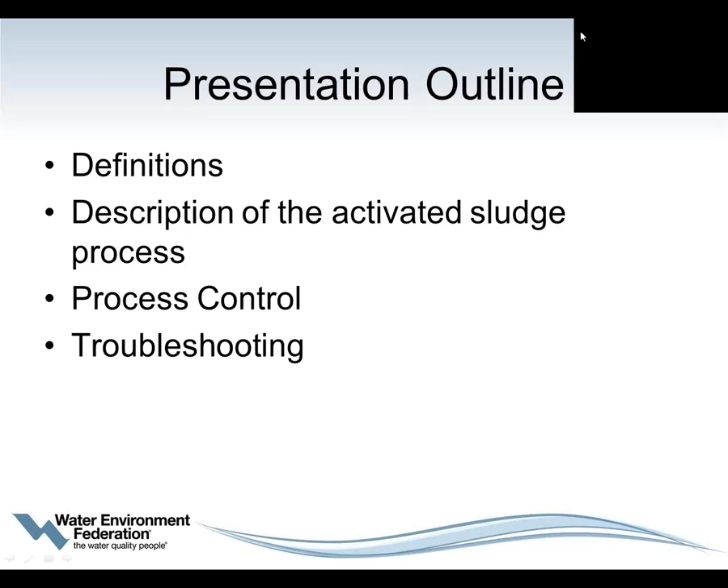First, some definitions that we're going to use throughout this webcast. The first is heterotrophic. Heterotrophic organisms are organisms that derive carbon for cell growth and energy from organic compounds. I like to describe heterotrophic organisms as us, and you'll see that explanation, why it holds, in just a little while. But briefly, we use carbon for cell growth, and we get our energy from organic compounds.

And we'll go into that a little bit more later. Autotrophic organisms derive cell growth from carbon dioxide, so they use inorganic forms of carbon. They're a little bit different in their behavior. Those organisms exist in the bioreactors along with the heterotrophic organisms, and they're responsible for nitrification, which occurs in most activated sludge wastewater treatment plants.

Aerobic, as all of you know, means that we have oxygen, dissolved oxygen, in the water. And we're going to say that an aerobic tank really has about 2 milligrams per liter of dissolved oxygen. And that can vary from one plant to the next.

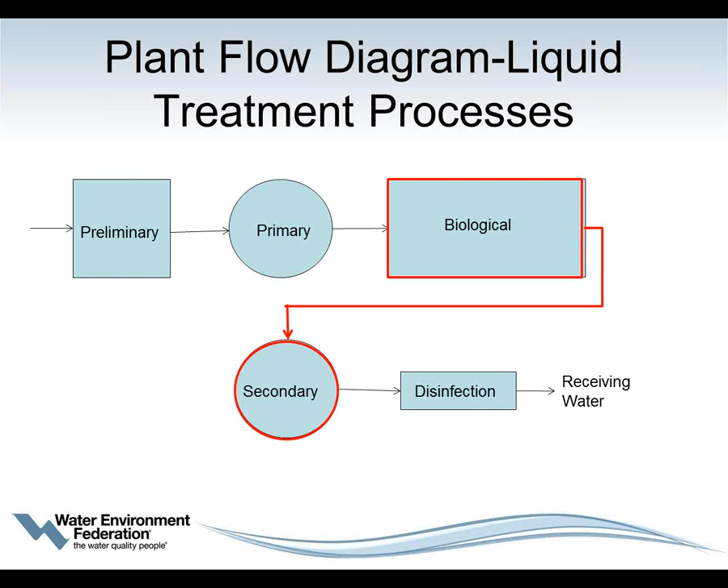As you can see from this diagram, if you have primary clarifiers, the primary effluent is what enters the biological system. So when making calculations around the activated sludge process, if you have primary clarifiers, you always use the parameters associated with the primary effluent. If you don't have primary clarifiers, then you would use influent characteristics.

So secondary treatment is biological wastewater treatment, and it removes at least 85% of BOD and suspended solids. If you think about a typical NPDES permit, which was mandated under the Clean Water Act of 1972, it mandated secondary treatment, which said 85% removal of BOD and suspended solids, and biological treatment meets that. It also stated less than or equal to 30 milligrams per liter of BOD and suspended solids.

There are two types of secondary treatment. Biofilms, also called attached growth or fixed film, typically trickling filters and rotating biological contactors, and then suspended growth, which is the activated sludge process, which is what we're going to be concentrating on in this webcast.

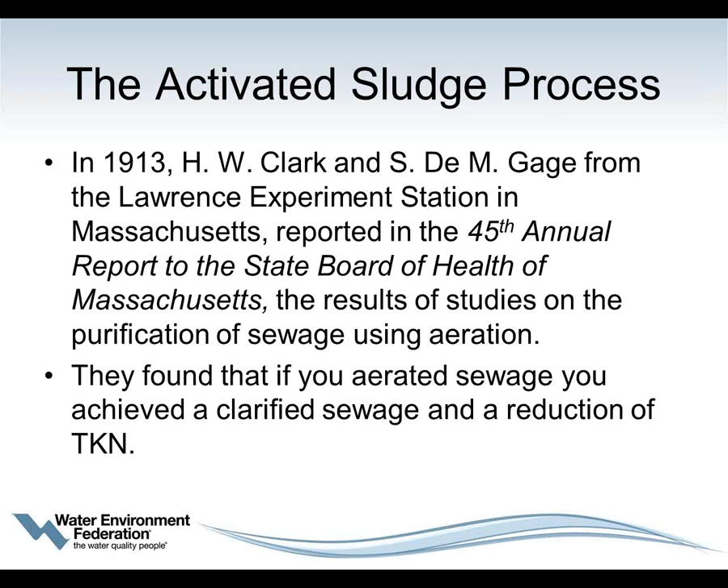So this year is a very important year for the activated sludge process because it's 100 years old. In 1913, two researchers, Clark and Gage, at the Lawrence Experiment Station in Massachusetts, found that if you aerated sewage, you achieved a clarified sewage and a reduction of nitrogen. Very interesting results. They published those results in a report to the Massachusetts State Board of Health, and that was in 1913, 100 years ago.

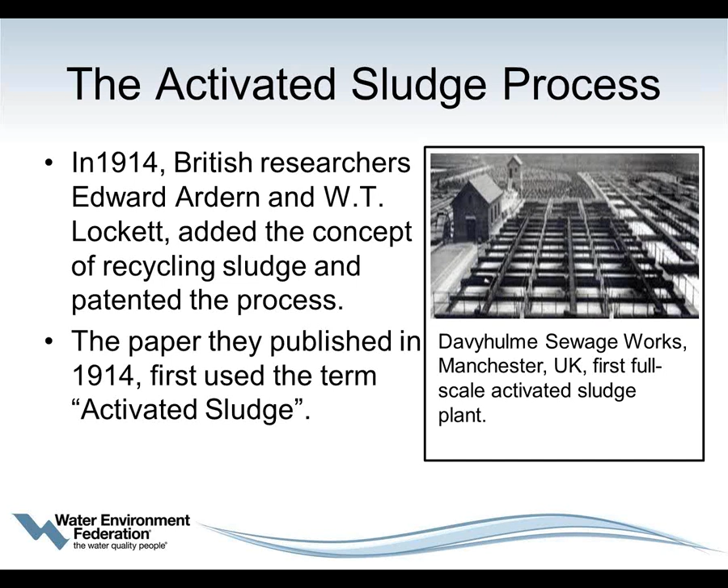In 1914, two British researchers, Ardern and Lockett, took the concepts from Clark and Gage, and what they added was a recycled stream, and they patented this process. In a publication in 1914, they first used the term activated sludge. The photograph you see is the original first full-scale activated sludge plant, at Davyhulme Sewage Works in Manchester, England, and it is still a functioning wastewater treatment plant.

When we look at the activated sludge process, you can classify it according to the loading rate, expressed as volumetric loading, or by SRT, either a very short or a very long one, or food to microorganism ratio, a very low one or a very high one. They're classified as high rate, conventional, or low rate, depending on these things such as SRT, food to microorganism ratio, and volumetric loading. We're going to be concentrating on a conventional activated sludge process.

Typically, a conventional system will remove BOD between 85 and 95%, and you can even see it higher, close to 99% BOD removal in a well-designed and well-functioning conventional activated sludge process. For most of them, the mixed liquor suspended solids concentration is between 1,000 and 3,000 milligrams per liter, but I've seen plants operating up to as high as 5,000 milligrams per liter.

Typically, they'll have an SRT between 3 and 15 days, although normally for BOD removal you see it at the lower end, 3, 4, 5, 6 days, and F to M ratios between 0.2 and 0.4 pounds per pound or kilograms per kilogram.

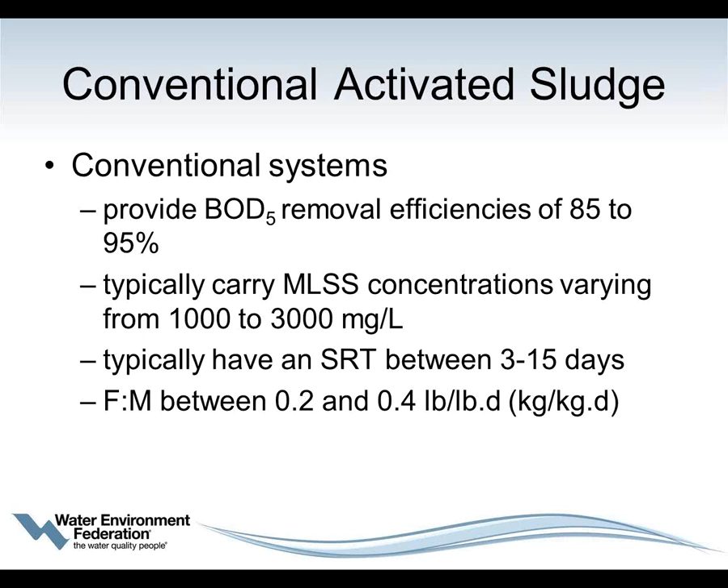So for an activated sludge plant, we're going to need a biological reactor, aeration tank, which could be a single unit or multiple units. We need a source of aeration because we need oxygen and mixing. We need a way of separating out solids, so we have clarifiers, secondary settling tanks. We need a collection and delivery mechanism for the return activated sludge, and we need a means of removing excess solids from the system.

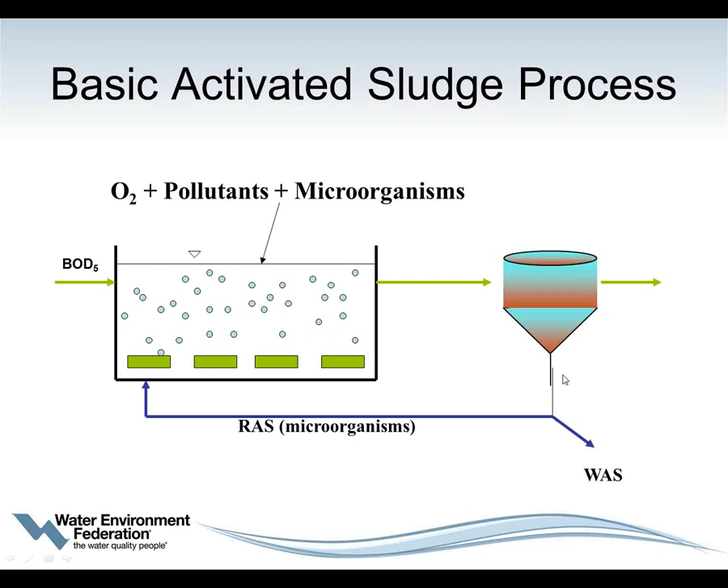So here's a basic activated sludge process. We have our BOD5 coming in with either our effluent, our influent, or our primary effluent. We have our biological reactor, which is aerated, so we have oxygen. We have our return activated sludge, providing our microorganisms, and then we have a waste stream so that we can control the amount of microorganisms within the process.

Just a reminder on biochemical oxygen demand. Biochemical oxygen demand is made up of two different aspects: one is the oxygen demand by the carbonaceous compounds, the organic compounds, and the other is the nitrogenous oxygen demand, made up of nitrogenous compounds. The two of them together form total BOD.

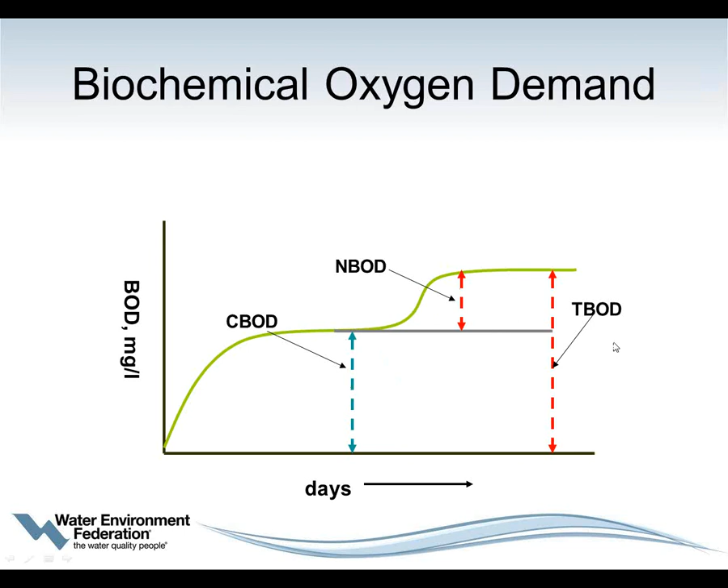Some states write their permits with total BOD. Some states write their permits with CBOD, just the carbonaceous portion. In order to get CBOD, you add an inhibitory chemical into the bottles. It inhibits nitrification, so you just get your CBOD. So just recall now that total BOD is made up of these two factors.

The activated sludge process removes carbonaceous BOD and also nitrogenous BOD. Most activated sludge treatment plants do those processes simultaneously. The carbonaceous BOD utilizes heterotrophic organisms, while nitrification, the nitrogenous BOD, uses autotrophic organisms, and it happens simultaneously. Some treatment plants don't want to nitrify, so they can operate their plant so it doesn't. But for the most part, a typical activated sludge plant will nitrify, satisfying that nitrogenous oxygen demand.

The design of an activated sludge plant is based on the length of time the solids are kept within the process, the SRT; the amount of food provided to the bacteria, the F to M ratio; and the hydraulic retention time. The hydraulic retention time is analogous to the detention time you'd calculate in a clarifier or settling tank, so that differs from the SRT. The hydraulic retention time is really how long a droplet of water remains in the system. With the solids retention time, it's a bit more complex.

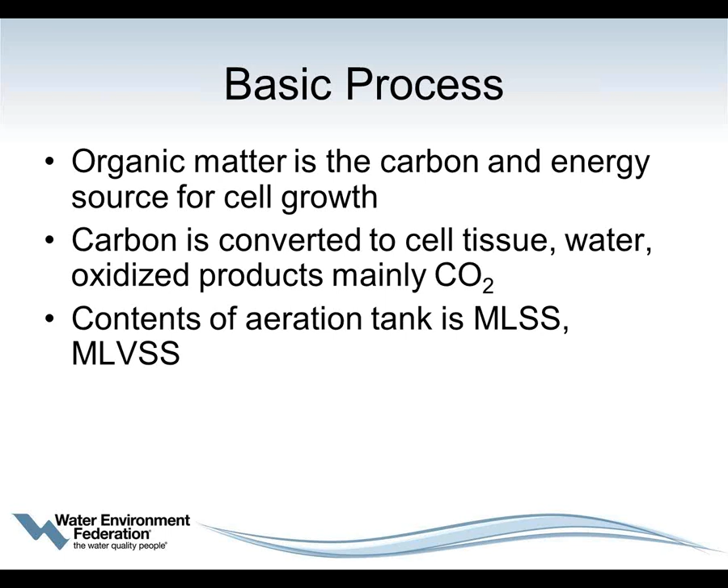As I mentioned earlier, heterotrophic organisms are very much like us, and it's a good way to remember what they do. We eat organic matter, which contains carbon - that's our energy source and allows us to grow cells. And when we respire, carbon dioxide and water vapor result. Very similar to our metabolism are the heterotrophic organisms.

The activated sludge process is really a big biochemical factory. It's amazing when you think of everything going on within that biological reactor and the various populations of organisms we have within that system. We have bacteria, fungi, protozoa, rotifers, nematodes. Bacteria are really the significant organisms for consuming the organic matter, so those are the ones really doing the work within these biological systems.

The predominant species of microorganisms depend on a lot of things: what are the characteristics of the influent wastewater, what are the environmental conditions? By environmental conditions I mean pH of the water, temperature, and dissolved oxygen - that's the environment in which these organisms are living. How our process is designed impacts our microorganisms, and how we operate our treatment plant.

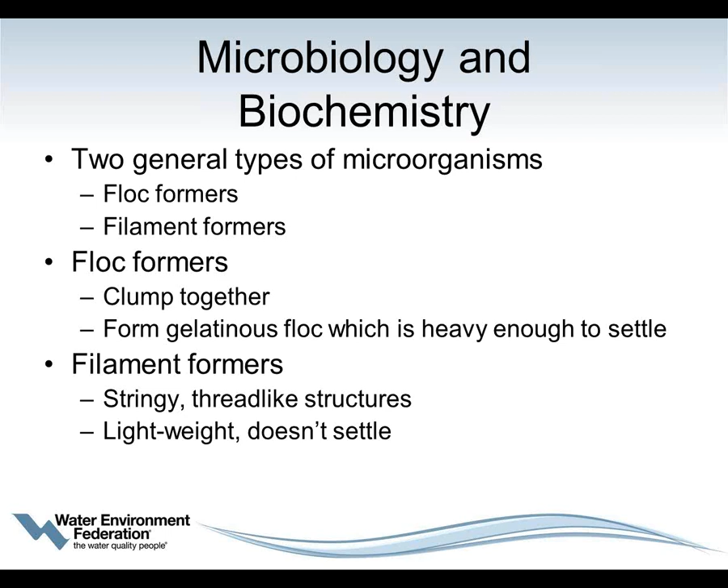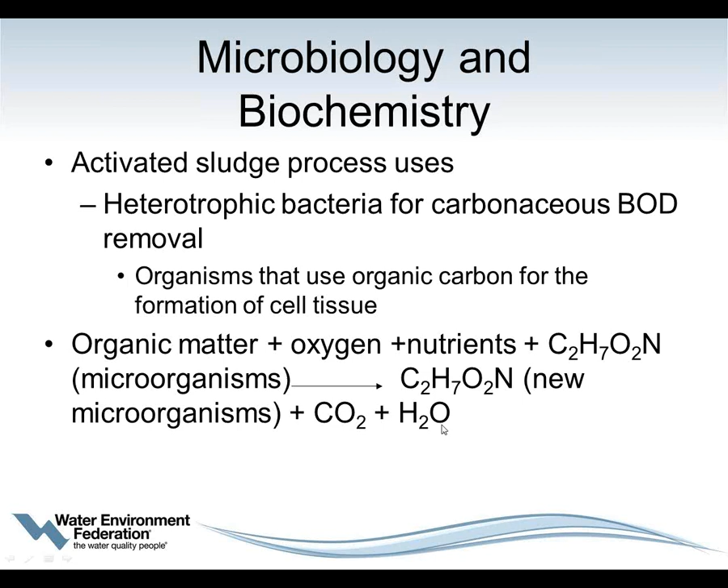So what happens is we produce new cells because we've gained energy from the organic matter, and the organisms respire, breathing out carbon dioxide and water.

As I mentioned earlier, in most activated sludge plants you'll also get nitrification, which is the conversion of ammonia to nitrite and nitrate. Many of you will have ammonia limits in your permit, often not greater than 2 milligrams per liter, because ammonia is toxic to many aquatic organisms. Nitrification is good because we get rid of toxic ammonia and form non-toxic nitrite and nitrate. This should not be confused with nitrogen removal, because we still have nitrogen being discharged to aquatic environments, but it does remove the toxicity of ammonia.

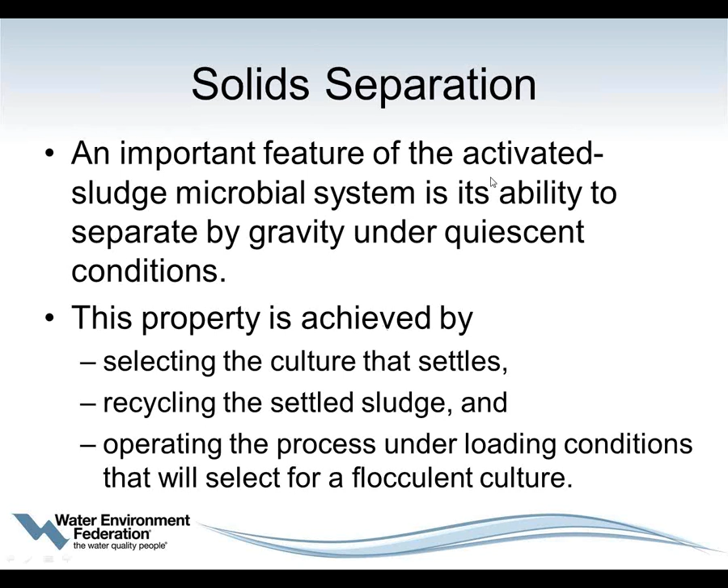So now let's look at process control.

With process control, it is our responsibility to ensure there's sufficient nutrients and food. We need to keep a balanced population of bacteria and protozoa, provide sufficient oxygen for these organisms, and provide mixing.

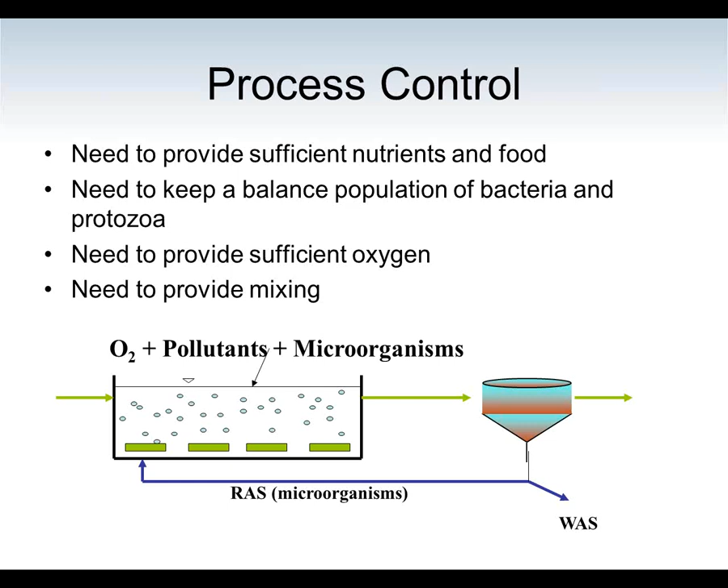So where do the food and nutrients come from? They come from the incoming wastewater. The food is in the form of BOD, and the nutrients are the nitrogen, phosphorus, and trace minerals that are part of the wastewater stream.

There are actually treatment plants with influent wastewaters deficient in nitrogen and phosphorus, so to make the process work they have to add nitrogen and or phosphorus so microorganisms can reproduce and grow. As a general rule, for every 100 parts of BOD you need 5 parts of nitrogen and 1 part of phosphorus. Recall, cells are made of carbon, hydrogen, oxygen, nitrogen, and as I mentioned, some phosphorus.

We keep our balanced population through the return activated sludge, the RAS. That's the source of microorganisms to the aeration tanks, and typically we return 30 to 50% of influent Q. We usually have pumps that allow us to return a lot more, because designers provide typically 100% recycle rates, but we normally operate in the 30 to 50% range at most treatment plants.

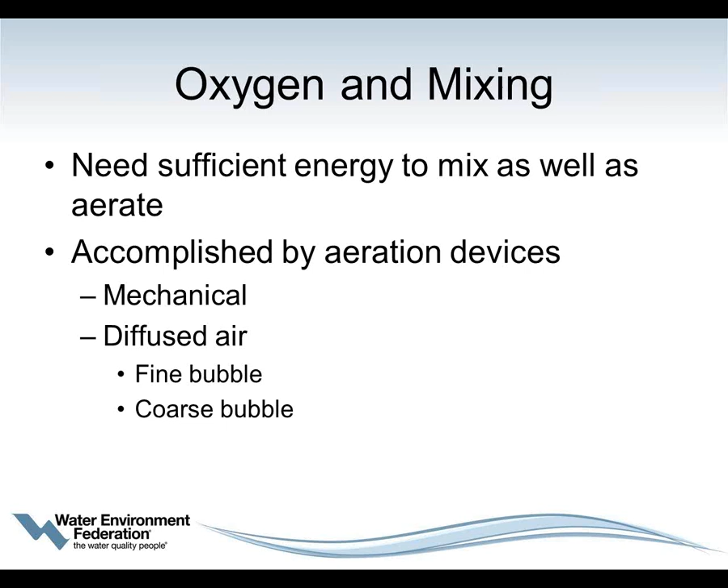Just as an aside, because so many of us are concerned about the high energy costs associated with operating our wastewater treatment plants, aeration is the biggest consumer of power in the wastewater treatment plant and represents at least 50% of the total power demand for treatment. So as you look to new aeration equipment, it's really important to look at designs that meet the mixing requirement and the oxygen requirement, but at the lowest possible cost. There's now a lot of new technologies on the market that really allow us to optimize for the most efficient energy costs.

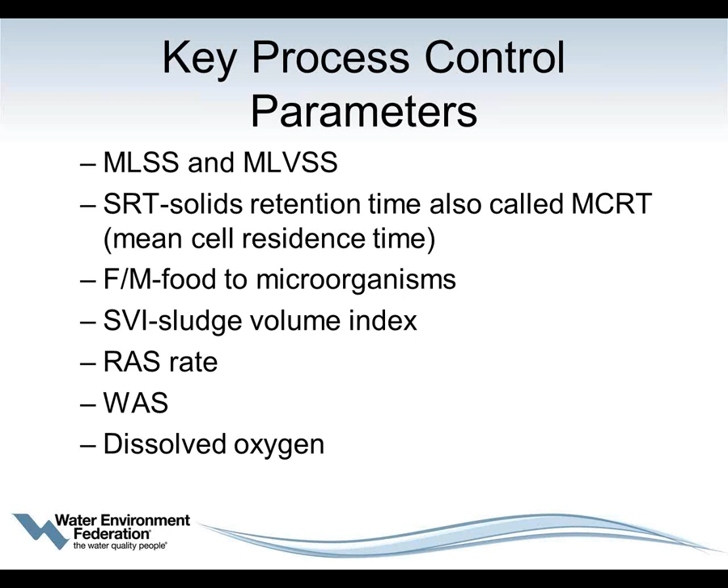So as we look at process control, what are the key parameters that we have to look at? Well, mixed liquor suspended solids and mixed liquor volatile suspended solids. Our solids retention time, which is also called MCRT, mean cell residence time—I use SRT. Food to microorganism ratio, F to M. Sludge volume index, SVI. Our return activated sludge rate, and our waste activated sludge rate, and dissolved oxygen.

So what is mixed liquor suspended solids? It's the concentration of suspended solids that's in the activated sludge mixed liquor. We measure that—most treatment plants measure it on a daily basis because it's important in all of our process control calculations, and it really gives us an idea if we're in a stable operation. We express the results in milligrams per liter. What you do is you filter a sample, you dry these solids, and it's a combination of weighing them and re-weighing them. Typically 1,500 to 3,500, 1,000 on the low end.

On the high end, perhaps as high as 5,000 milligrams per liter. But it's very plant specific. What might be good for you might not be good for someone else. So you might run at 1,200 milligrams per liter, and your friend who runs another treatment plant might be operating at 4,000 milligrams per liter.

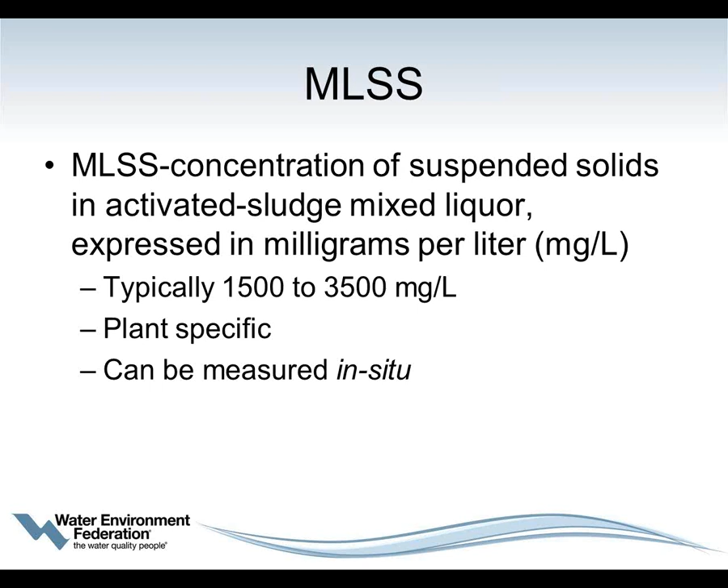Mixed liquor volatile suspended solids is the fraction of the suspended solids in activated sludge mixed liquor. It can be driven off by combustion at 550 degrees Celsius—you normally do it in a muffle furnace. So it's really all of the volatile aspects of the mixed liquor. We use it to indicate the concentration of microorganisms available for biological oxidation, so it becomes an indicator to us of how many microorganisms we have within the system. It's not an exact measurement because in this test we're measuring any volatile material, so dead cells that are no longer working our process will also show up as mixed liquor volatile suspended solids. But it's a good and close approximation and gives us the information that we need to manage and control our treatment plants.

Solids retention time is the same thing as mean cell residence time, is the same thing as sludge age—these terms we can use interchangeably, depending on what your favorite term is. Mine happens to be SRT, so I always use SRT. But they all describe how long solids remain within your system. And remember, the system is not only the biological reactor, but also the clarifier—we have to think of those two tanks as the same unit process.

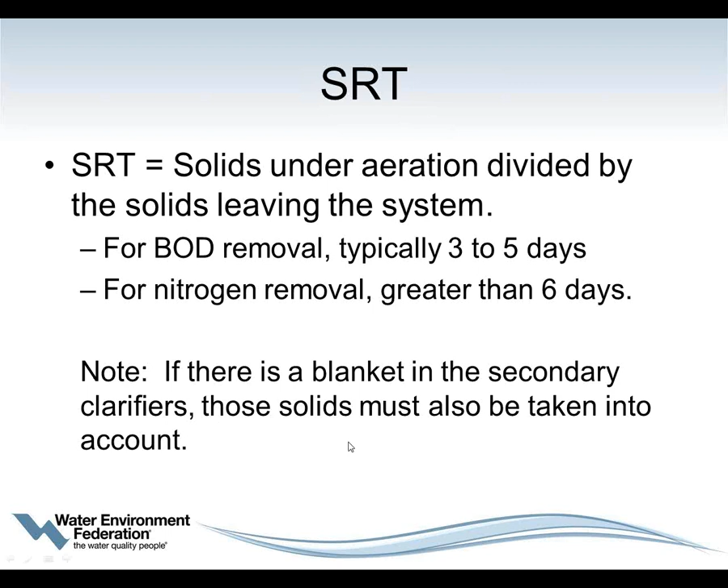So first, we'll look at this with US units. Our solids under aeration are calculated by the volume of the aeration tank in million gallons, times our conversion factor, which is 8.34 pounds per million gallons per milligram per liter, times our mixed liquor suspended solids in milligrams per liter.

And our solids leaving the system is our waste flow in million gallons per day times our conversion factor of 8.34 pounds per million gallons per milligram per liter times the concentration of our waste activated sludge in milligrams per liter. So that's the mass of waste activated sludge that's leaving the system.

And now we're going to add to that the mass of solids that are going out with our effluent. So that's our plant flow in million gallons per day times our conversion factor of 8.34 times our effluent suspended solids concentration. So if we put them together, it's solids under aeration, which is this first calculation, divided by solids leaving the system, which is this portion of the calculation.

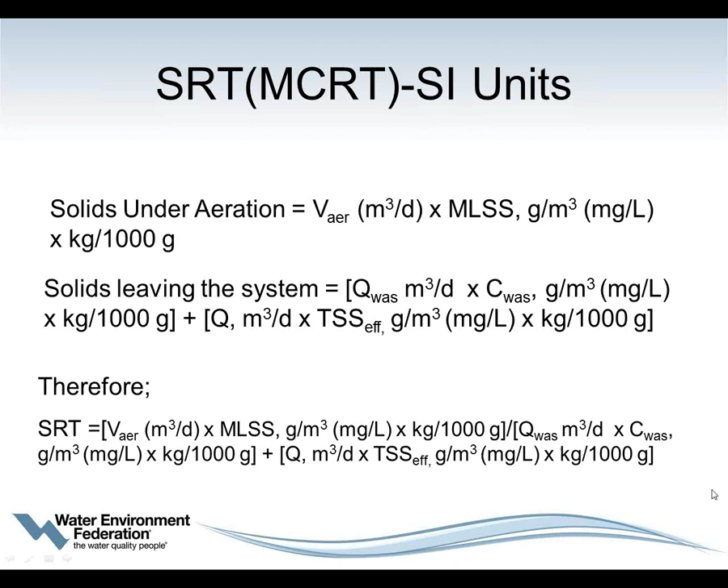So let's work through an example. If we have a treatment plant that has an aerator volume of 1.4 million gallons, that's equivalent to 5,300 cubic meters. Our plant flow is 3.1 million gallons per day, which is 11,735 cubic meters per day. Our mixed liquor concentration is 2,650.

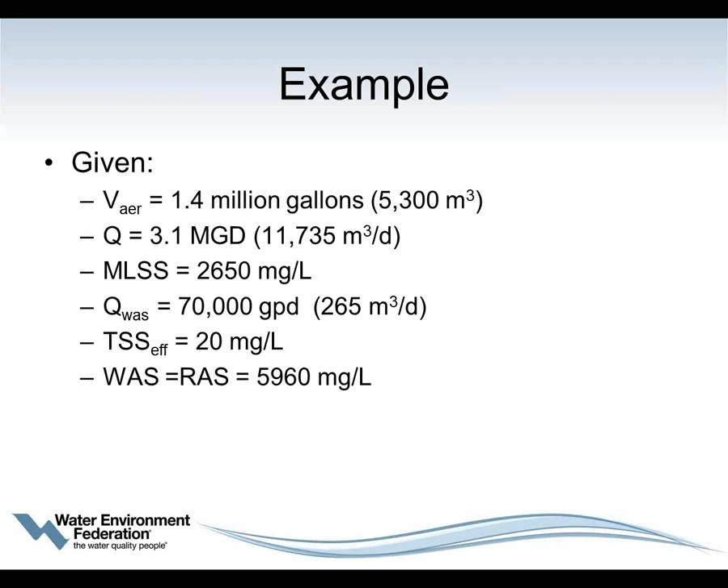Our waste flow is 70,000 gallons per day, which is equal to 265 cubic meters per day. Our effluent suspended solids is 20 milligrams per liter, and our waste activated sludge concentration is equal to our RAS concentration at 5,960 milligrams per liter. Most treatment plants waste from the RAS lines, so the concentrations are going to be similar. Some plants waste mixed liquor, and in that case you would use the mixed liquor suspended solids concentration.

So here's a worked example using those numbers. We have our 1.4 million gallons times 8.34 times 2,650. The million gallons cancels out, the milligrams per liter cancel out, and we're left with pounds. So the number of pounds under aeration,

30,941 pounds. The solids leaving the system, we said 70,000 gallons, but we want that in million gallons, which is 0.07 million gallons, times 8.34 times 5,960, plus our plant flow at 3.1 million gallons times 8.34 times 20 milligrams per liter, which is 3,997 pounds per day. So it's solids under aeration divided by solids leaving the process, so we have an SRT of 7.7 days.

If we look at that same calculation using SI units, we have a volume of 5,300 cubic meters times our concentration of 2,650 grams per cubic meter. We divide that by 1,000 and we get 14,045 kilograms. Cubic meters cancel out, grams cancel out, and we're left with kilograms.

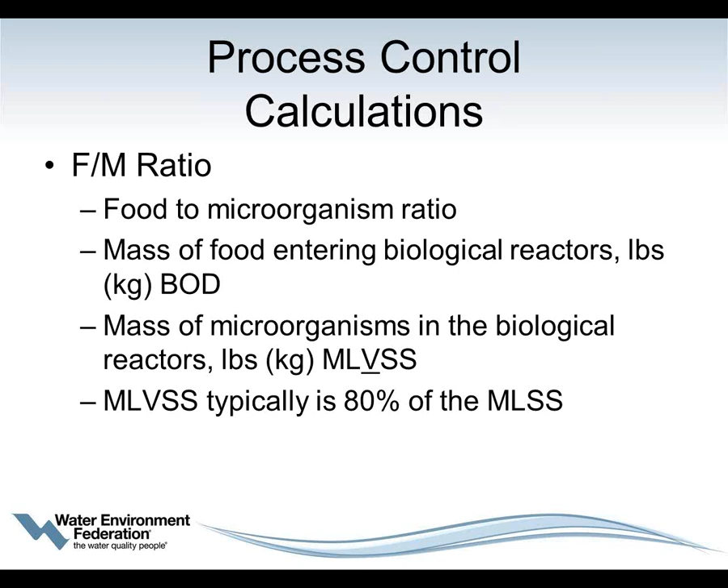And this time, we're looking at the mixed liquor volatile suspended solids. So in the SRT, we used mixed liquor suspended solids. In the F on M ratio, we're going to just be looking at the volatile portion of that, which is typically about 80% of the mixed liquor suspended solids.

So here's our calculation in US units. Our food is our plant flow in million gallons a day times our conversion factor, 8.34, times our BOD in milligrams per liter. And our microorganisms are our volume of our bioreactor in million gallons times 8.34 times mixed liquor volatile suspended solids. We divide the food by the microorganisms.

And here's a worked example. We're using a mixed liquor suspended solids of 3,000 milligrams per liter, 82% volatile in this example. We have our influent flow of 16.5 million gallons a day. The volume of our bioreactor is 7.5 million gallons. Our primary effluent BOD is 135 milligrams per liter.

So in calculating our food to microorganism ratio, it's our plant flow, 16.5 times 8.34 times 135 milligrams per liter, divided by 7.5 times 8.34 times 3,000, which is our mixed liquor suspended solids. But remember, we want volatile suspended solids, so we have to multiply that by 0.82, 82%. If you look at this, we can cross out these, this cancels this, so you don't even have to multiply by 8.34 in either the top or the bottom. And we get an F on M ratio of about 0.12.

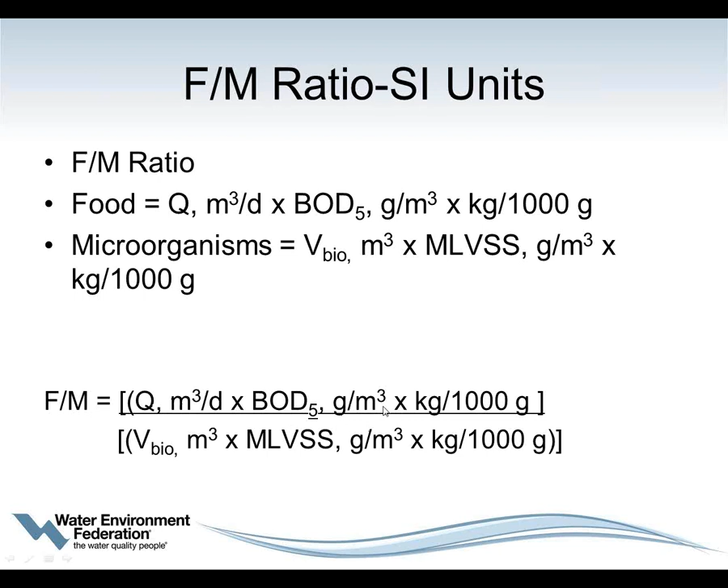In SI units, it's basically the same calculation, except now the flow is in cubic meters per day. The concentration is in grams per cubic meter, and again, our conversion to kilograms. So we still have our 3,000. We've converted now our plant flow, which we've converted to the metric system, which is 62,460 cubic meters per day, times our concentration of primary effluent BOD, which is 135 grams per cubic meter, converting to kilograms.

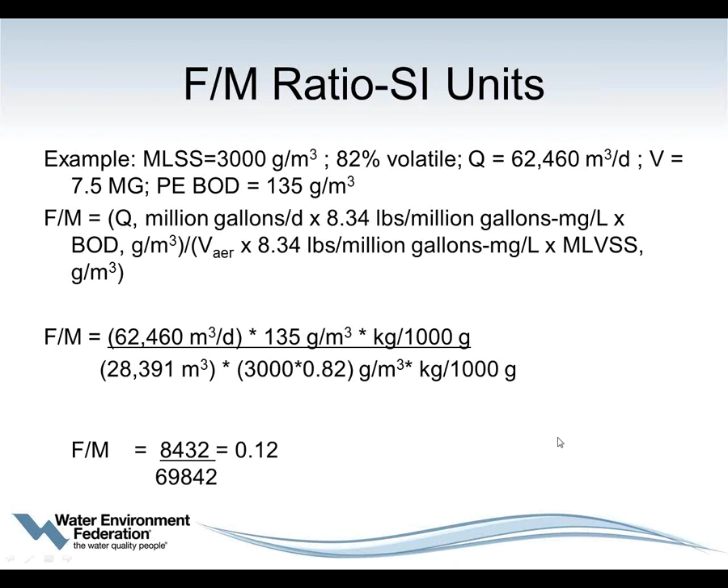And we're dividing it by the volume of our bioreactors converted to metric, which is 28,391 cubic meters times 3,000 times 0.82, again 82% volatile, converting that to kilograms, and we end up with an F on M of 0.12.

Typically, at most treatment plants, you would want to be between 80 and 150. But like all other things, I have been to treatment plants that are running at SVIs of 250 or 300 and still getting excellent effluent quality. So again, like everything else, this is plant specific. But you should know what your target SVI is, because that's going to tell you how well your clarifiers are performing, because basically this test is mimicking what is occurring in your secondary clarifiers.

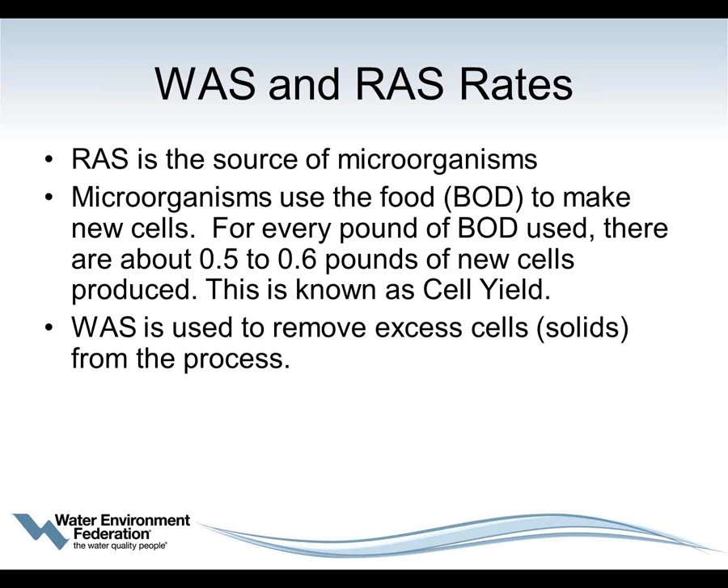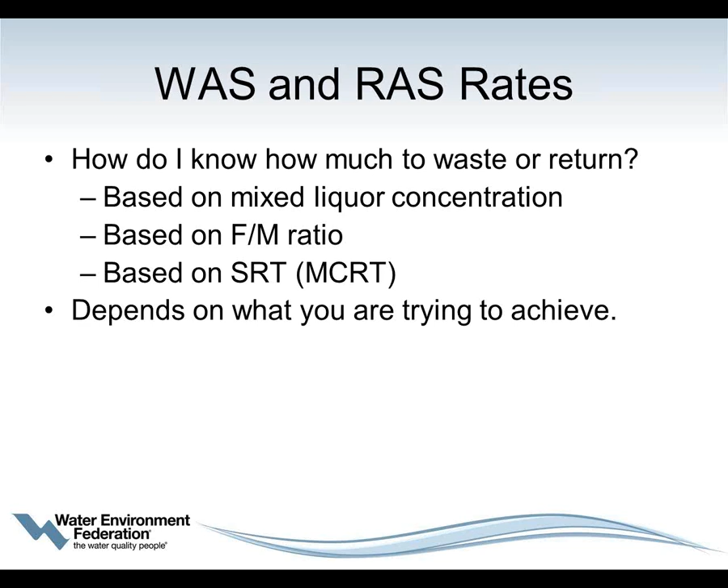But because we're generating these new cells, we need to remove the excess cells, and we do that through our waste-activated sludge. So we always ask ourselves the question, how much should I waste? How much should I return? Well, we base that on mixed liquor concentration. What's our target mixed liquor concentration? What's our target F on M ratio? What's our target SRT? What are we trying to achieve within our plant?

As I mentioned earlier, typically the RAS is 30 to 50% of the influent flow. Could be higher, might be lower. Designers generally give us the capability of 100% recycle, and that gives us redundancy. One thing you have to be very careful of: if you raise the return rate past a particular point, the secondary clarifiers can fail. In a little while we're going to look at solids loading rates on the clarifiers, and you'll see how the return activated sludge rate impacts that.

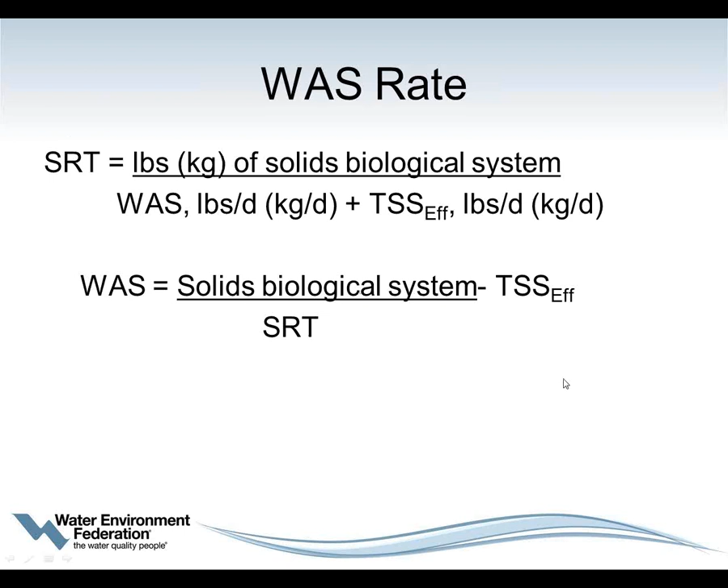We can calculate how much to waste by rearranging the SRT formula and solving for waste-activated sludge. So here's our SRT formula: the pounds, the mass of solids in the biological system, divided by the mass of the waste and the mass of the effluent. We can write it in words like this and rearrange it through simple algebra. Waste-activated sludge equals the solids in the biological system divided by the SRT, minus the suspended solids leaving in the effluent.

So if we look at this calculation now, in the U.S. system, waste-activated sludge in million gallons per day is the mass of waste-activated sludge divided by 8.34 times the concentration of waste-activated sludge. In the metric system, we want the result in cubic meters per day, so it's the mass of waste in kilograms divided by the concentration in grams per cubic meter, with a conversion from grams to kilograms.

And one of the things we really want to know is what's the volume of that? How long is it going to take us to waste? How many minutes do we have to operate our pump? The next series of examples is going to show you that.

Let's say our waste-activated sludge is 6,774 pounds per day. That's divided by 8.34, and if we have a concentration of 8,600 milligrams per liter, we end up with 0.094 million gallons per day, which is 94,000 gallons per day. Let's say our pump is a 250 gallon per minute pump. So in a given day we have to pump 94,000 divided by 250 gallons per minute, which is 376 minutes or 6.2 hours. So we would have to run this pump for 6.2 hours every day to remove the amount of waste material that we need to.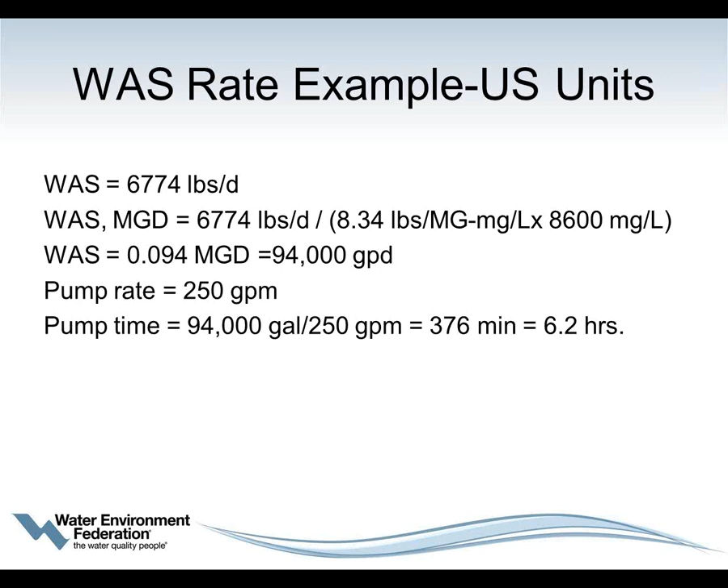This is the calculation that shows how we calculated the 6,774 pounds. By rearranging the SRT calculation, here's our mass under aeration minus what's leaving the system, divided by our 10-day SRT.

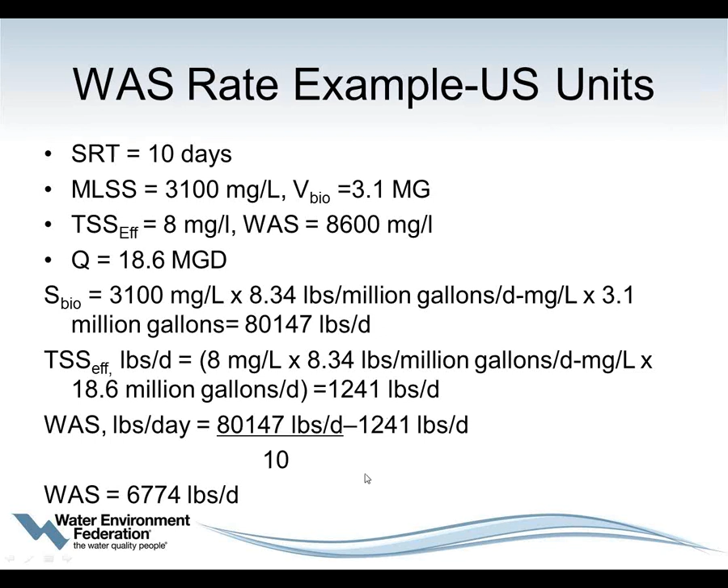So now let's look at microbiology. We have a big microbiological and biochemical factory. We have indicator organisms that we use all the time because they are easy to see under a microscope. Bacteria are a lot harder, but with simple microscopes we can see amoebas and flagellates, motile ciliates, stalk ciliates, rotifers, and nematodes, and they all tell us different things.

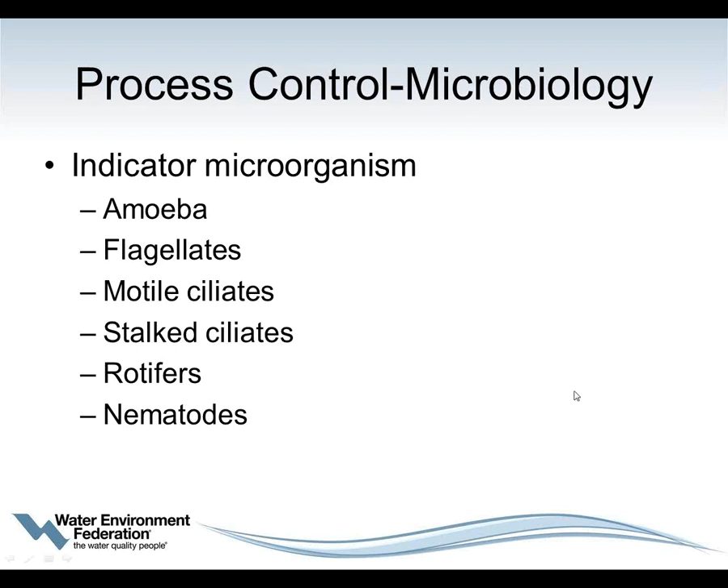The little dots in the background on this slide are bacteria. These are stalked ciliates. You can see the cilia, the little hair-like structures on them.

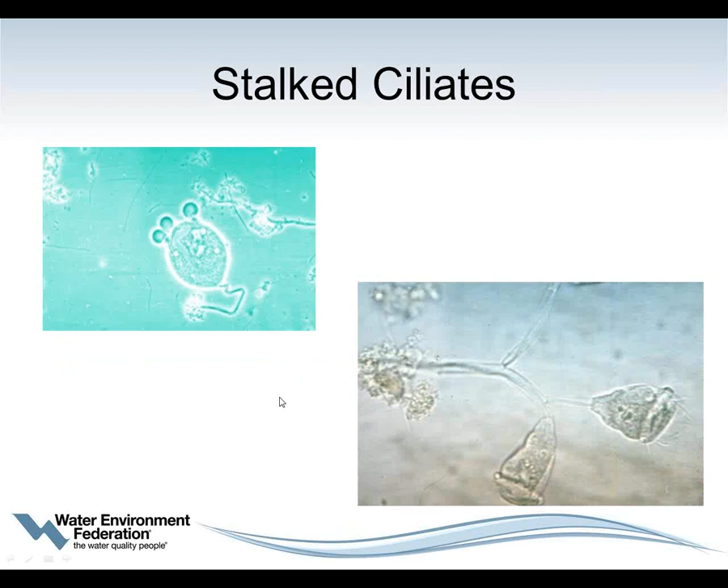These are some more stalked ciliates. They're really quite pretty to see under the microscope. In these particular micrographs, they've been stained so they can stand out.

Here's our rotifers. This is a drawing of one, and these are actual rotifers seen under a microscope.

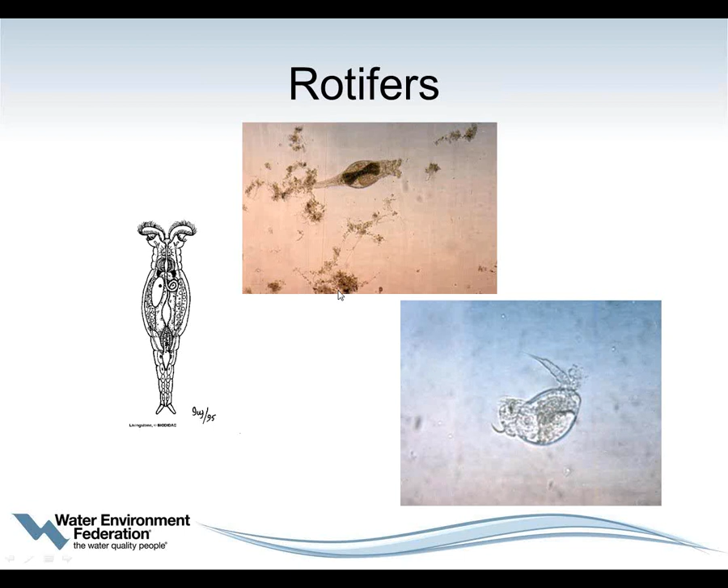They're really not the prettiest things to see under the microscope, and they're very, very large. Here's some of your activated sludge floc in here, and you can see how large these nematodes are relative to the sludge floc. They indicate a very old sludge.

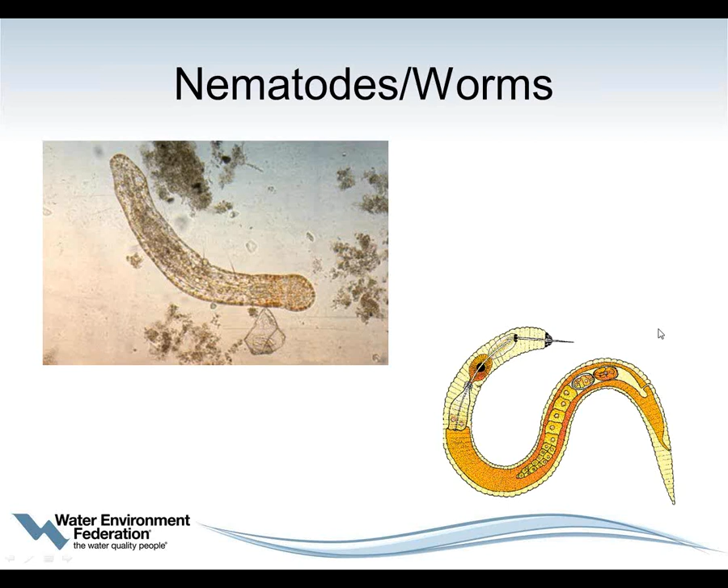And these are some of my favorite organisms. These are water bears. If you're doing nitrification within your aeration tanks, you'll tend to see water bears, and you can actually see little claws on the water bears, and they look very much like a bear.

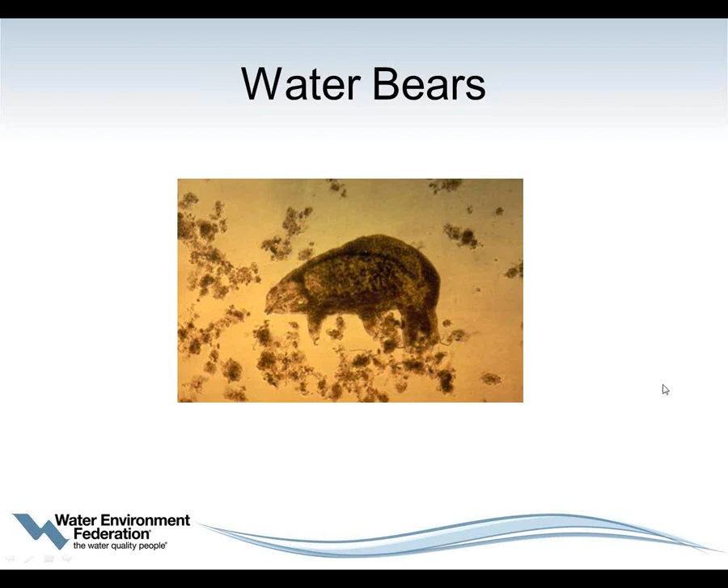Okay, so let's look at control strategies now. How do we control our wastewater treatment plants?

All operators have their preferred methods on how they decide how much solids to waste to maintain the optimum solids inventory. That's really the key to this activated sludge process, maintaining the optimum solids inventory, which gives us the population that does the right job for what we're looking for.

What's right for one plant may not be right for another, and it's kind of fun to talk to other operators and compare what you do. The strategies you could use for determining waste include looking at your F on M ratio, constant F on M, constant mixed liquor suspended solids concentration, or a constant solids retention time.

So if you use F on M as a control strategy, you set a target F on M ratio, let's say for example 0.25, and then you try to maintain that by wasting.

The problem with the F on M control strategy is if your BOD, if your influent or primary effluent varies a lot, maybe because of intermittent side streams, it's a lot harder to control your plant using the F on M control strategy.

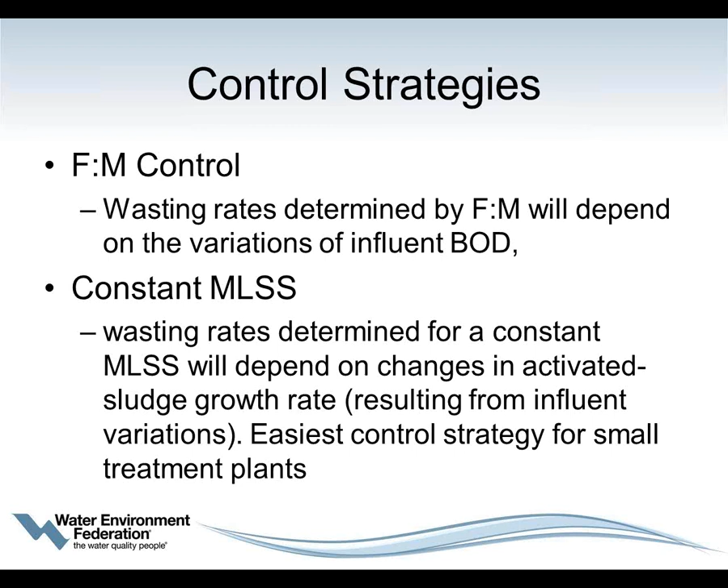And then SRT. SRT is pretty much used at most treatment plants, especially larger treatment plants. What you do is set a target SRT, and you waste the same proportion of activated sludge inventory every day, regardless of the variations in the influent wastewater.

So for example, if you set a target SRT of 10 days, every day you'll waste 10% of the mass of the mixed liquor suspended solids in your bioreactors. So if you have 100,000 pounds of mass of mixed liquor suspended solids, every day you would waste 10,000 pounds to maintain a 10-day SRT.

SRT control is easier for operators to maintain. It gives operators more control on the process and more stability. But you really need to decide for yourself which one is easiest for you, which gives the best performance for your treatment plant, because the whole key is ensuring that you make permit, ensuring that you protect water quality.

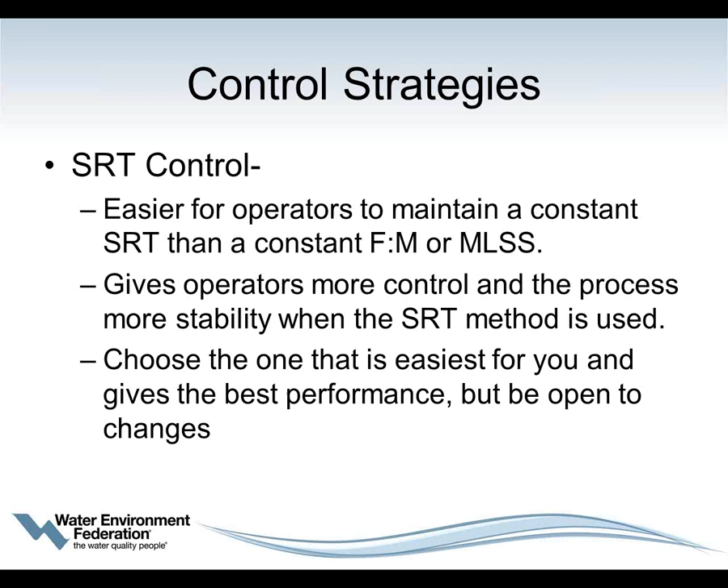But you should be open to suggestions and changes. The most important thing is to choose what you're comfortable with.

So we talked earlier about the activated sludge and the advantage of the activated sludge with the ability to settle solids. Solid separation is critical.

Clarifiers are part of the activated sludge process, as I mentioned. You always draw the boundaries around both the activated sludge tank, the aeration tank, and the clarifier.

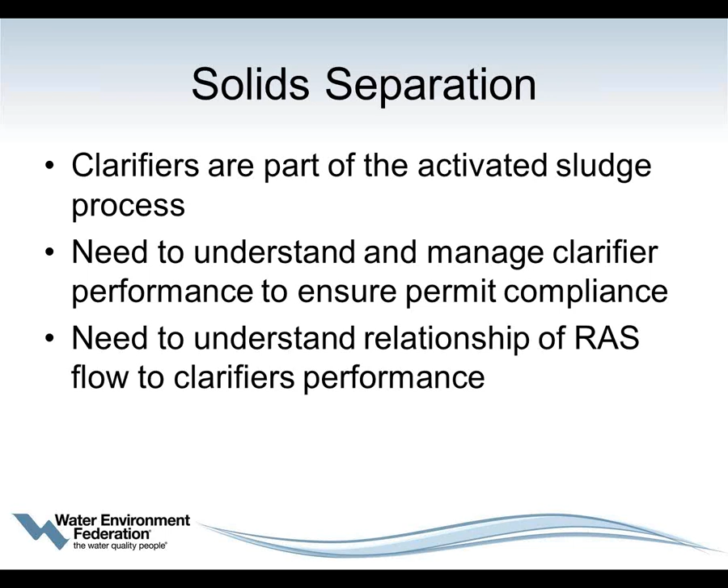As operators, you need to understand and manage clarifier performance so that you get optimum permit compliance, and also a good quality return activated sludge, that it settles well, that it is a good concentration. So you have to know how RAS impacts clarifier performance.

There are 5 parameters that have the most influence over the performance of a well-designed secondary clarifier: the mixed liquor suspended solids concentration, the flow to the clarifier, the wastewater flow, the return activated sludge flow, the surface area of the clarifier, and the settleability of the activated sludge, that's the SVI. That's probably of critical importance, keeping the SVI in your target range.

Typically, secondary clarifiers are circular, but you do see rectangular ones. They have lower detention times than primary clarifiers because the solids that settle, the activated sludge, is biological sludge, and it decomposes fairly rapidly. If it decomposes, you'll get gas bubbles rising to the surface. This happens a lot if you're only nitrifying in your bioreactors, and then you'll actually denitrify in your secondary clarifiers, especially if you carry a deep blanket where you have an area devoid of oxygen. You'll get denitrification and see those bubbles rising to the surface, and lots of times clumps of solids coming to the surface, which can impact your effluent.

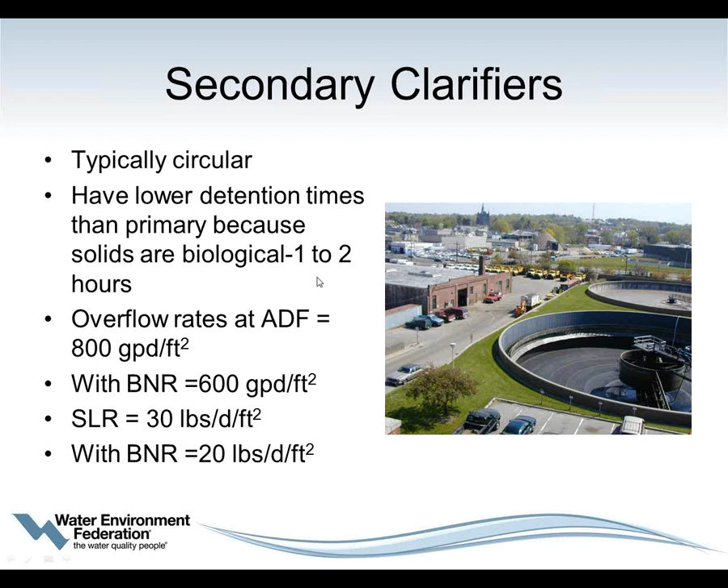Surface overflow rates are important to calculate. They describe the hydraulic loading of your clarifiers. We use them in design and in process control. The surface overflow rate is the plant flow in gallons per day divided by the surface area in square feet. Or in the SI system, it's your flow in cubic meters per day divided by your area in square meters. So if you're in the United States, your SOR is reported as gallons per day per square foot, and outside the United States using SI, it's cubic meters per square meter per day.

Let's look at an example. We have an area of 7,000 square feet per unit, which is 650 square meters per unit. We have a flow of 5,500,000 gallons per day, which is 20,820 cubic meters per day. So we divide the 5,500,000 gallons by 7,000, and we get a surface overflow rate of 786 gallons per square foot per day. In the SI system, it's 20,820 cubic meters per day divided by 650 square meters, or 32 cubic meters per square meter per day.

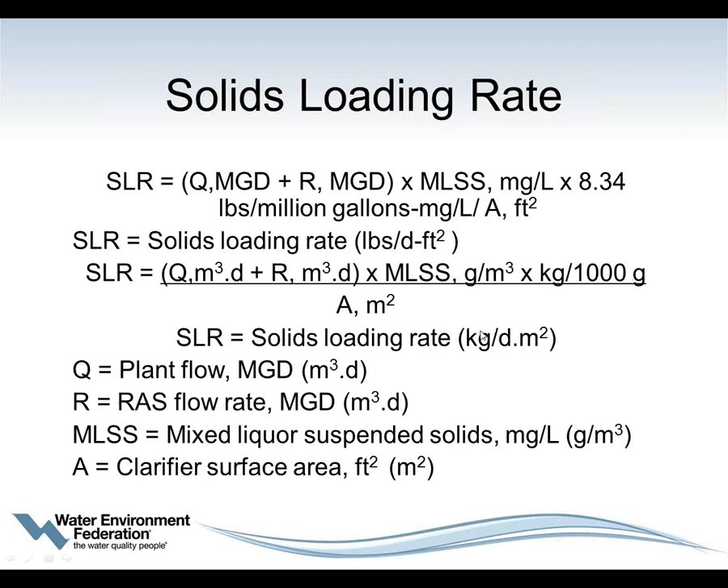Let's look at an example. We have a plant that has 18.2 million gallons per day, or 68,894 cubic meters per day. A return flow of 7.7 million gallons per day, or 29,148 cubic meters per day. Mixed liquor concentration of 3,350 milligrams per liter. A surface area of 39,978 square feet, which is 3,714 square meters. If we take our plant flow plus our return flow, multiply it by our concentration, in the U.S. by our conversion factor, divided by the area, we get a solids loading in U.S. units of 18 pounds per day per square foot, and in metric units, 8.2 kilograms per day per square meter.

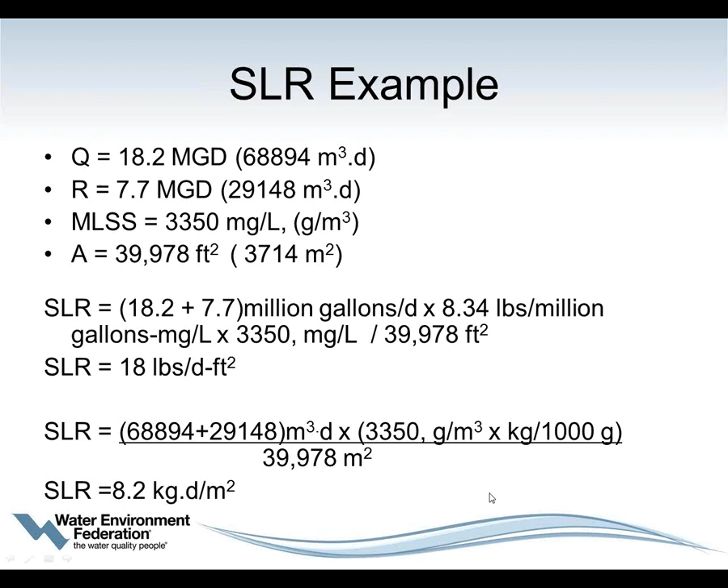Let's look at the tools we have available for process control. There are 4 steps needed to manage any process: we need to have the information associated with it, we need to look at that data and evaluate it, we need to develop and implement a proper response, and then we have to go back and reevaluate to make sure the response we came up with really did its job.

The information available to us is analytical data, runtime meters, visual information, and a lot of miscellaneous facts. Information is only as good as the device used for analysis. If your laboratory data is suspect, you can't really make judgments on it. If your meters are not calibrated, you can't make process judgments based on that. So you need to be very careful with the instruments you use, that they're calibrated, and with your analytical procedures, that they're done properly.

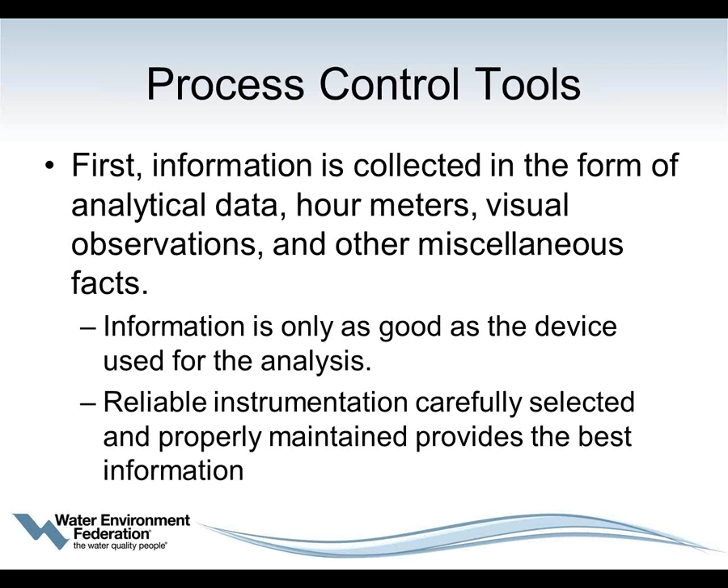A lot of times SCADA systems will generate the graphs. Certainly programs like Excel can easily generate graphs of all different kinds. And so that's what you really need, visual aspects to be able to really see the variabilities. And things will stand out to you.

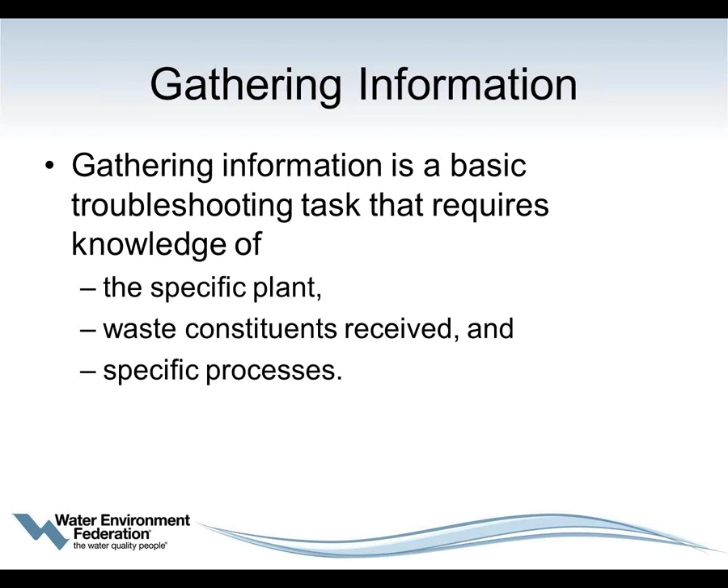So how do we gather the information? Well, the very first thing you need to do is ask, do we really have a problem? Or did the laboratory give us bad information? Let's say the laboratory comes back with an effluent suspended solids that's way above permit, and yet you go out and look, and the effluent looks really good. Before you start making any changes, you want to verify that. Have another test taken.

If there is a problem, when did you first see it? If you see solids carry over in the clarifier, when was it first observed? And did anybody do anything about it? Has someone already made a change? Because you don't want to make changes upon changes.

If you're having a process upset, take a look at the biomass under the microscope, because those microorganisms are going to give you a lot of information very, very quickly. You can look at it and determine if there's a problem almost instantaneously. And of course, just being out by the aeration tanks, looking at the mixed liquor, smelling it, that will give you very, very good information once you understand what your normal plant is like.

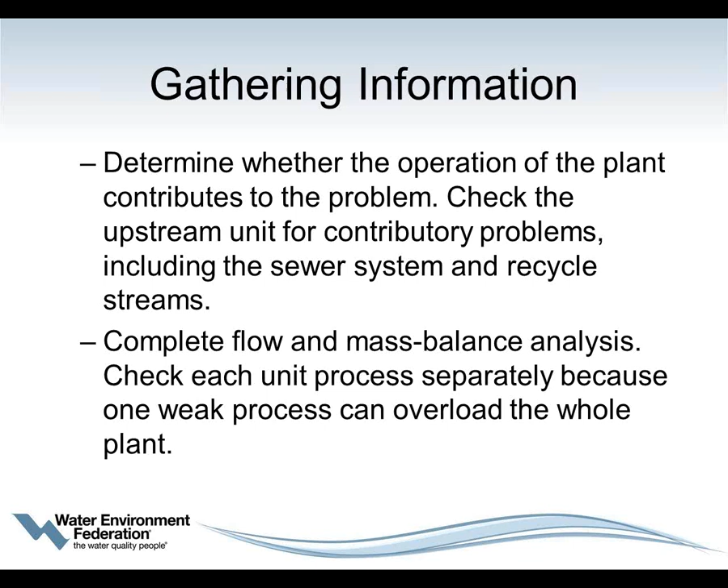The other thing is, was there something that was done within the plant that contributed to a problem? Was there a side stream that maybe should have been metered into the plant slowly but came in as a slug? So was it internal to the plant, or was there something outside of the plant that was discharged into the plant? You need to take a look at whether or not it's internal or external.

For the laboratory, you want to make sure that you have a good quality assurance program. You want to make sure that you don't have chemical leaks in your system that's going into the process. You want to make sure that your bioreactor air delivery system is working well, and that there's no other mechanical or electrical problems.

So before you start making any kinds of changes, you need to gather the information associated with the problem. Was there a power outage? Did an RAS pump go down and it didn't restart automatically? You need to separate the symptoms from the problems.

You want to talk to all of the operators, anybody that's observed what the problem is. Listen to them, listen to their interpretation. But you want to be able to yourself interpret what they're saying.

You want to treat the disease, not the symptom. So you want to look at the root cause of what's happening. Lots of times we're tempted to treat the symptom, but what you want to do is treat the disease. And sometimes things aren't always as they first appear, so you don't want to make a judgment right away. It's more important that you take your time, analyze the problem, make sure that everybody sees the problem the same way you do, and then start taking corrective action.

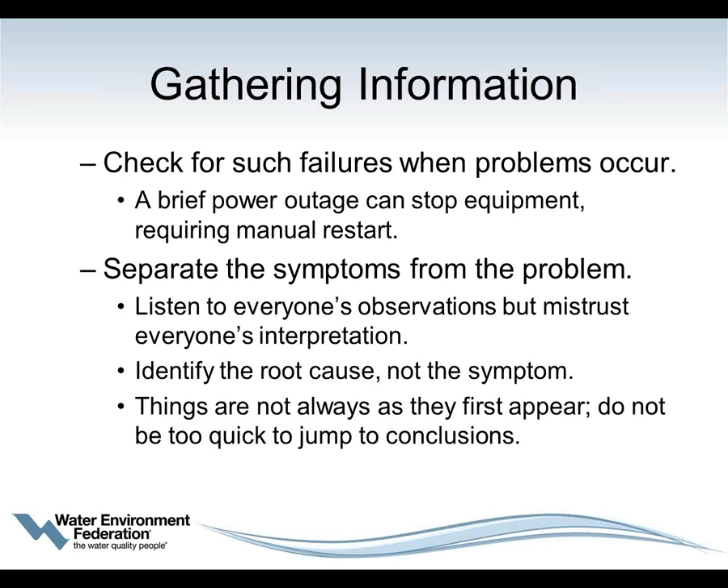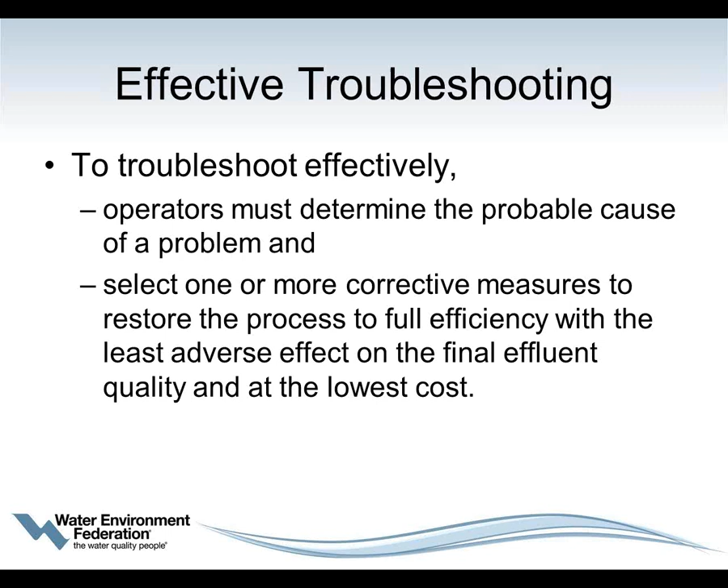To effectively troubleshoot, you've got to determine the probable cause of a problem, and then select one or more corrective measures to restore the process so that you have the least effect on the final effluent and hopefully at the lowest cost. However, you only want to make one corrective change at a time.

In order to be able to troubleshoot, you need to have thorough knowledge of your plant's process. You need to understand it and be very, very familiar with it. You need to know what your influent characteristics are typically, what the plant flow rates are, how does the flow pattern change. You want to look at your design and actual loading parameters. Are you within that? Did you get a slug which has increased the load coming into the plant?

What's the typical performance of the overall plant and each unit process? So you need to really, really be familiar with your plant and what the maintenance procedures are. Sometimes maintenance can cause us a problem, so you need to know what our maintenance procedures are.

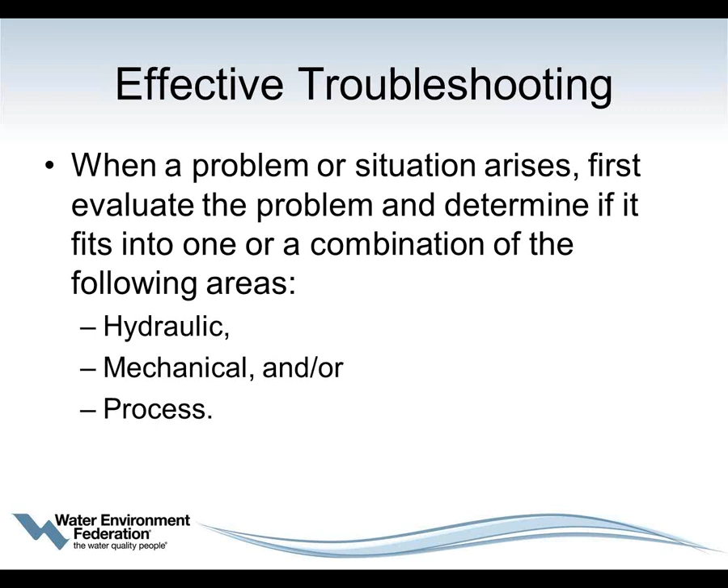So when a problem arises, you need to find out, does it fit into one or more of these areas? Is it due to hydraulics? Is it due to a mechanical failure? Or is it due to a process upset? Or is it due to a combination of these?

So what are hydraulic problems? Well, they're easy to detect because you get solids washout in secondary clarifiers typically, and it's typically from rainstorms. It's especially true if you have a combined sewer system, but in recent years with climate change, we're seeing more severe rainstorms, and so we're seeing plants that are in towns that have separate systems really spiking on their influent flows, causing really severe hydraulic problems through the system.

You may have a problem where you had to take a tank out of service for emergency repairs, and that may be causing hydraulic overload on the downstream equipment.

Mechanical problems can result in effluent violations, so they need to be... you really need to have high quality maintenance. You need to ensure that you have redundant equipment. So if an RAS pump goes down, you want to make sure you have a standby RAS pump, because otherwise you're going to build up sludge in your clarifier and your mixed liquor is going to drop in your bioreactors.

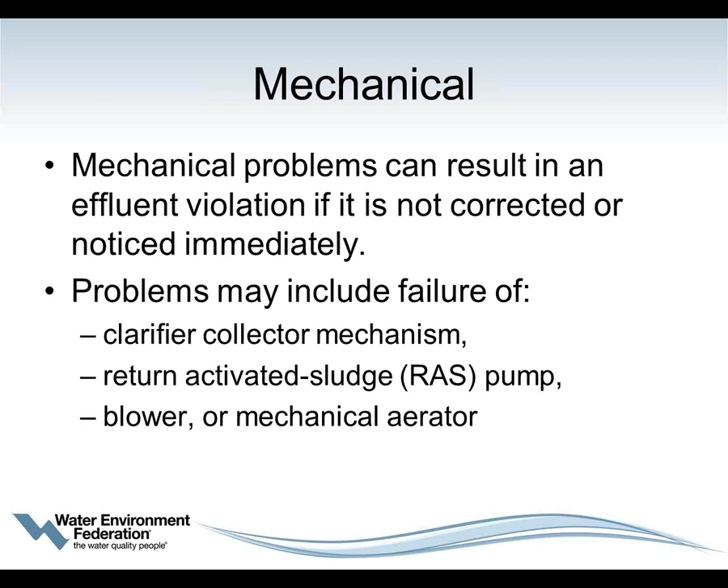So some of the problems that typically occur is problem with the collector mechanism on the clarifier. You can see them, sometimes they get overloaded. Sometimes debris will fall into them and it will catch the rake and will fail. Your return activated sludge pumps, sometimes your blowers will fail, or you'll have a problem with the mechanical aerator, or sometimes you'll see some of the headers with diffused air actually breaking and floating to the surface of the tank.

So mechanical problems are pretty easy to solve, or at least identify. Process problems are a lot more challenging. We really have to be kind of forensic experts in analyzing process problems.

One of the most important things is maintaining good records, because with good records, many times you see warning signs of an impending problem. You'll see your SVIs maybe starting to creep up. And this again is the value of graphing your data on a regular basis, because you'll start seeing something creeping up or going down.

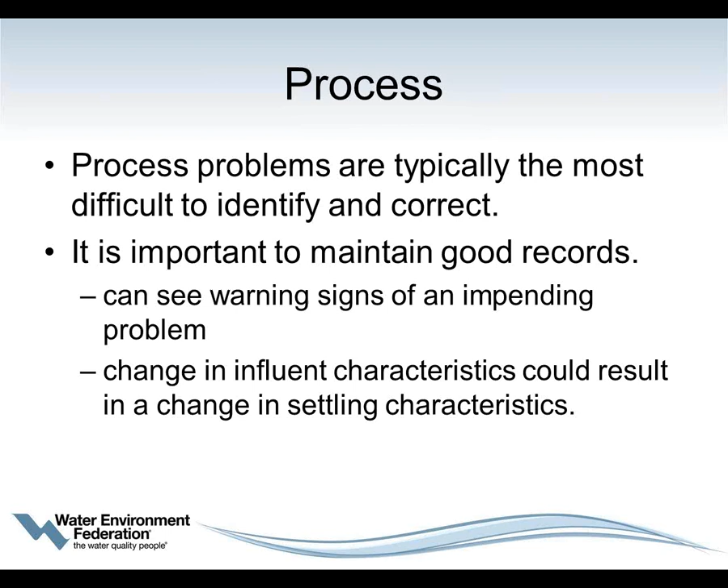Maybe your influent characteristics are changing. Maybe you have a normal influent BOD of 250 milligrams per liter, and then all of a sudden they're jumping up to 350 or 400, and that can change your entire plant operation. So you need good records, and you need to look at those records and put them in a form that gives you the most information in the quickest possible time.

You need to be familiar with the side streams. These side streams can include digester supernatant. It can include your filtrate or centrate from your filter presses or from your centrifuges. And if those change, they will have an impact on your treatment plant. You need to pay attention to dissolved oxygen concentrations.

A number of years ago, at a plant I was working at, the dissolved oxygen started to plummet. They put on all of the blowers they had, and still the dissolved oxygen continued to drop, no matter how much air they were putting in there. The mixed liquors started to drop off within a 20-hour period of time. It turned out a toxic came into the plant and affected the microorganisms. Paying attention to that dissolved oxygen concentration and the mixed liquor suspended solids gave the plant personnel an understanding of what was happening.

You really need to have those plant records, and you really need to look at them on a daily basis in order to effectively troubleshoot your treatment plant.

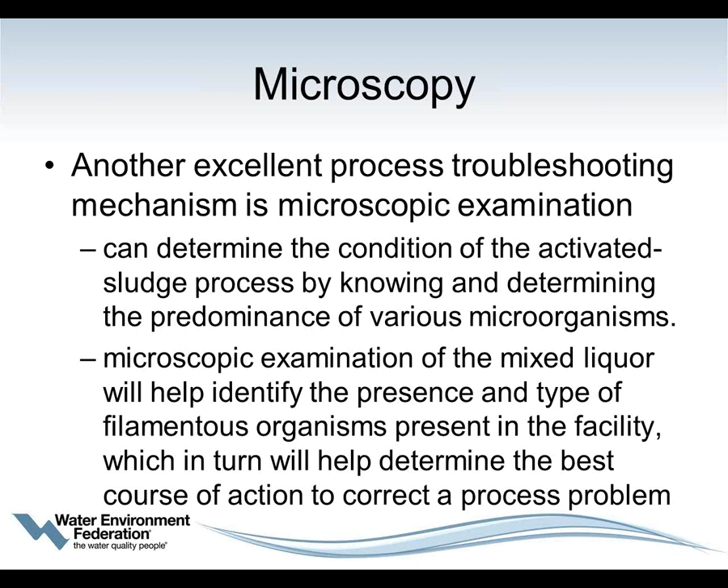To troubleshoot, we need a lot of skills. We really are forensic scientists. We need investigative thinking and a logical use of what we have available to us. You don't want to jump to judgment. As you investigate things, you want to look at all of the data associated with it and then use the kinds of tools that we have in a logical way.

When troubleshooting and taking corrective action, you don't want to make more than one change at a time, because you need to know whether or not a change was effective. Multiple changes made all at once, you don't know which made the difference. So if you have a problem in the future, you don't know which one you should do.

The activated sludge process is biological, so the responses are not quick, to our frustration. It can take days or weeks before process improvement can be seen. Many times it's 2 to 3 times your SRT. So if you're running at a 10-day SRT, that could be 20 or 30 days before you really see the kinds of improvement that you want to see. It takes a huge amount of patience when you troubleshoot and try to make changes in a process.

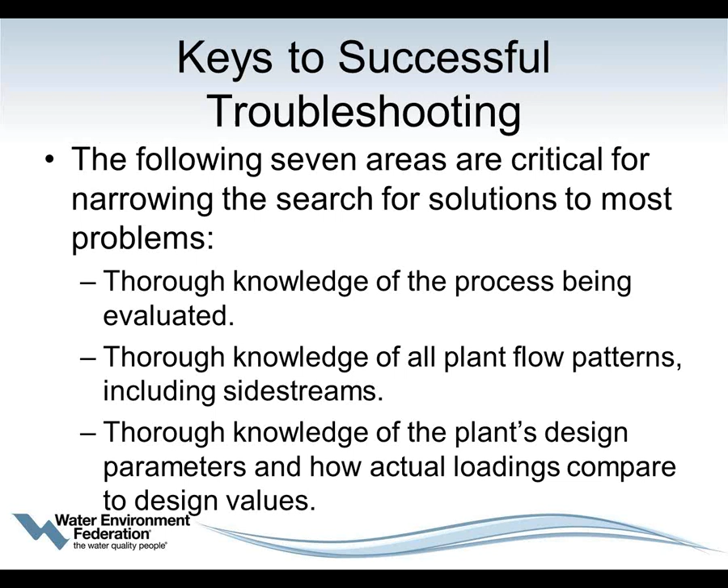So successful troubleshooting requires thorough knowledge of your process, thorough knowledge of your side streams, thorough knowledge of loading and design values, thorough knowledge of your maintenance procedures, and the ability to recognize abnormal conditions and what alternatives are available to us when trouble happens.

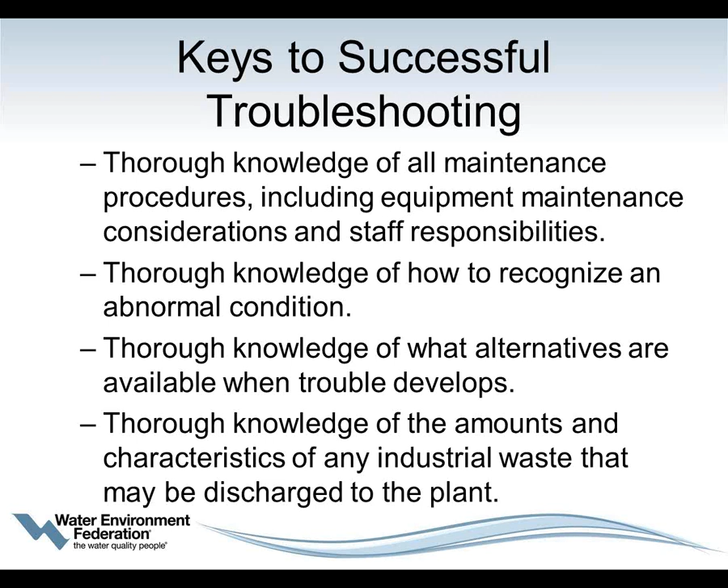Do we have spare pumps? Do we have a spare bioreactor, a spare aeration tank, where maybe we can put some of the mixed liquor temporarily to prevent solids carryover in our clarifiers? And thorough knowledge of the industries that are discharging to the treatment plant, because sometimes an industry will have a problem and discharge something to us that's really harmful.

Laboratory testing is incredibly important. You want to look at settleability tests, sludge volume index, mixed liquor respiration rate, OUR or specific OUR. This gives us a lot of information as to whether or not a toxic chemical came into the plant. Again, these are not difficult tests to do. We always want to look at dissolved oxygen, and we also want to monitor our sludge blanket within our clarifiers, operating with a minimum blanket.

But if after 30 minutes you get a pretty good sludge, yet after an hour or 2 hours, which is a typical detention time in the clarifiers, your solids start to float, you may have an effluent problem. If you don't get any settling at all, if you have a very dispersed floc, then you have a problem within your plant.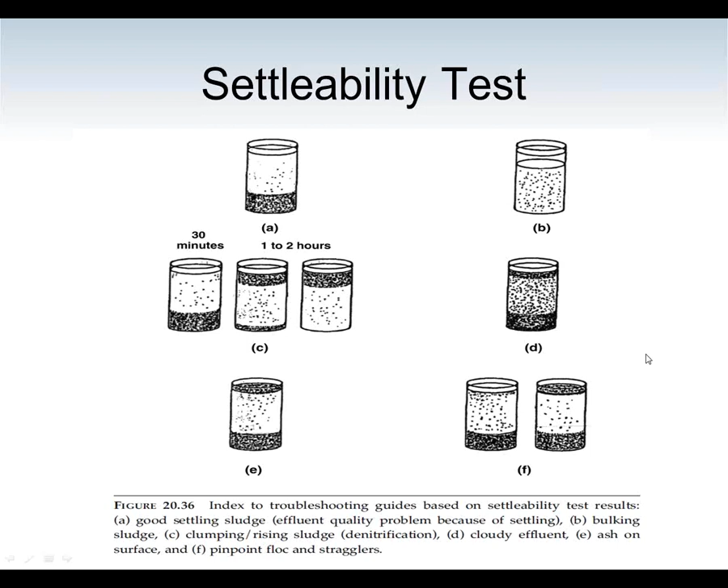So let's look at a few of the common operational problems: foaming in the bioreactors, solids washout either through hydraulics or solids loading, and we'll look at some bulking. Lots of times we'll see a lot of white foam in our bioreactors.

White foam tends to indicate a young sludge, one with a low SRT, maybe a day or less, and it's often found in treatment plants that are brand new. When you start up a treatment plant for the first time, you'll often see a lot of this white billowy foam. I've actually seen it blowing across roads adjacent to the treatment plant because the wind will just catch it. That's because the mixed liquor suspended solids concentration is too low, meaning the food to microorganism ratio is too high. In other words, there's a lot of food but not enough microorganisms, so you get this white foam.

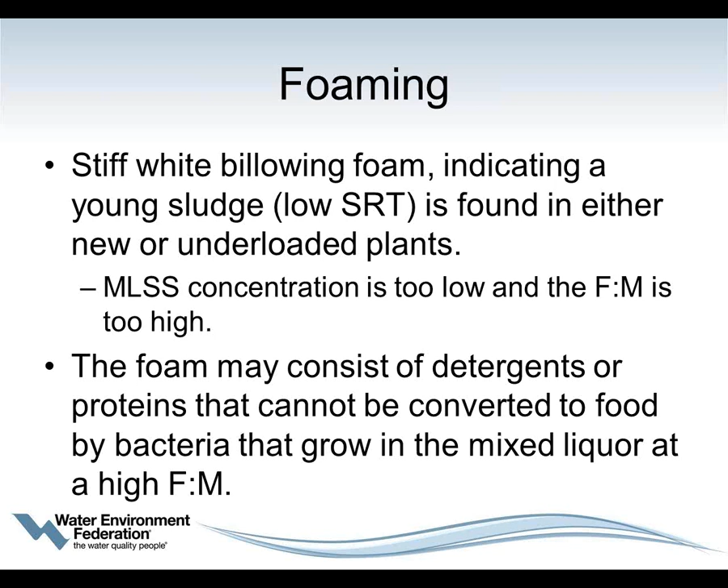Some of the causes in a plant that's already running involve the RAS flow. For example, in the middle of the night the RAS pump goes down and nobody notices. The next morning your mixed liquor is at 800 and you've got tons of white foam over the surface of the aeration tank. Or somebody turns on the waste activated sludge pump and doesn't turn it off, wasting a lot more sludge and resulting in a very low mixed liquor suspended solids.

Or you might get a toxic or inhibitory material coming into the plant. Those are very difficult to identify and difficult to track back to the source. Sometimes herbicides and pesticides can be really toxic to these systems. If you have a very low or very high pH, not enough dissolved oxygen, or not enough nutrients, you can also get this white billowy foam.

And what you'll see is a lot of biomass in the secondary clarifier effluent.

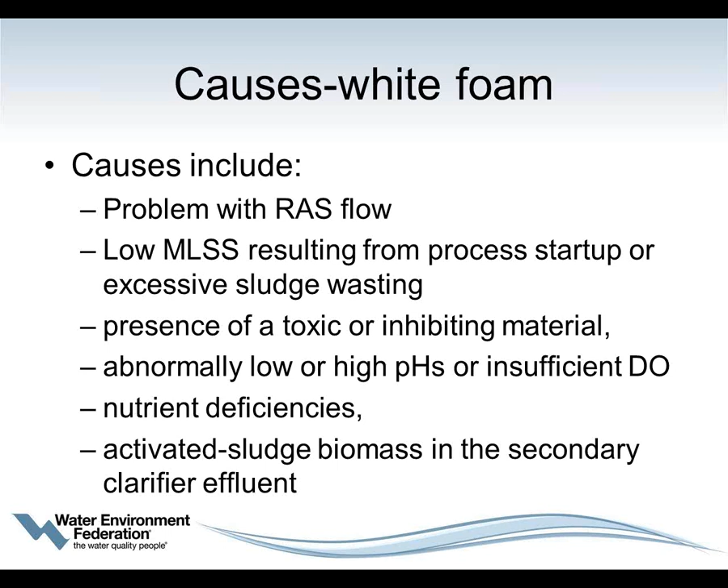Some corrective measures you can take: make sure your return activated sludge is flowing to the biological reactor at the rate you want. Ensure the sludge blanket is in the lower quarter of the clarifier, between 1 and 3 feet from the bottom, or about 0.3 to 0.9 meters, preferably on the low end, around 1 foot or 0.3 meters. You might also want to stop wasting. If your mixed liquor concentration has dropped significantly, stop wasting until it comes back up to your target value, or until your SRT comes up to your target value.

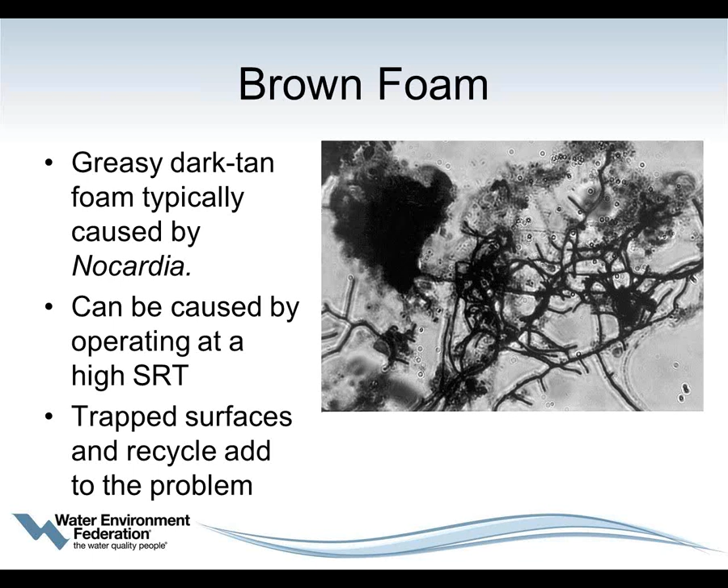One of the worst things we see is brown foam. There are other causes for brown foam, but one typical cause is nocardia. This photomicrograph shows the typical nocardia organism. It's often caused by operating at high solids retention times, although it's also common at low solids retention times. If you have trapped surfaces, or if you recycle the foam, it compounds the problem and it gets worse and worse.

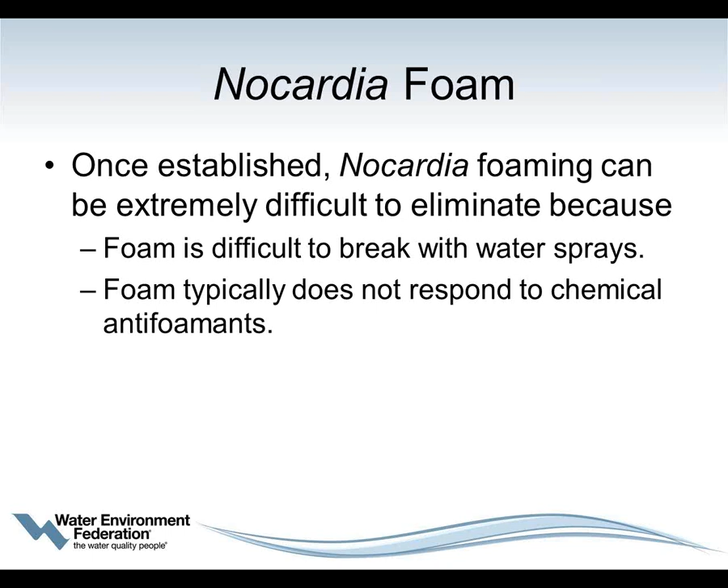Nocardia foam is very difficult to eliminate. It's difficult to break with water sprays. It really has the consistency of chocolate mousse. In fact, if you have a significant amount on the surface of your aeration tanks, it represents a lot of solids and really ought to be taken into account in your SRT calculations. It also doesn't respond well to chemical antifoamants—either they don't penetrate deeply enough through the foam, which is part of the problem since it's such a thick, viscous material. I've also tried chlorinating, spraying chlorine water on the surface of the foam, and it'll penetrate a little bit and clear up the surface of the foam layer, but it won't penetrate deeply enough in many cases if it's very thick to be effective.

You can chlorinate the return activated sludge. It doesn't totally eliminate nocardia, and the issue is that it'll affect the nocardia only if it's outside of the floc. If it's extending outside of the floc, you'll see some effect from chlorination. But if it's inside the floc, the floc protects it, so it'll just stay there and continue to increase.

You can increase wasting, but that has some limitations because the foam itself is not wasted with the waste-activated sludge, although some modern plants now have foam wasting systems, where at the end of the aeration tank you'll have a foam overflow weir, and the foam can be wasted directly to thickening or dewatering equipment. That's very good, it gets the foam out of the system, especially if you could put some chlorine into that foam when it's containerized before it goes to the dewatering or thickening equipment.

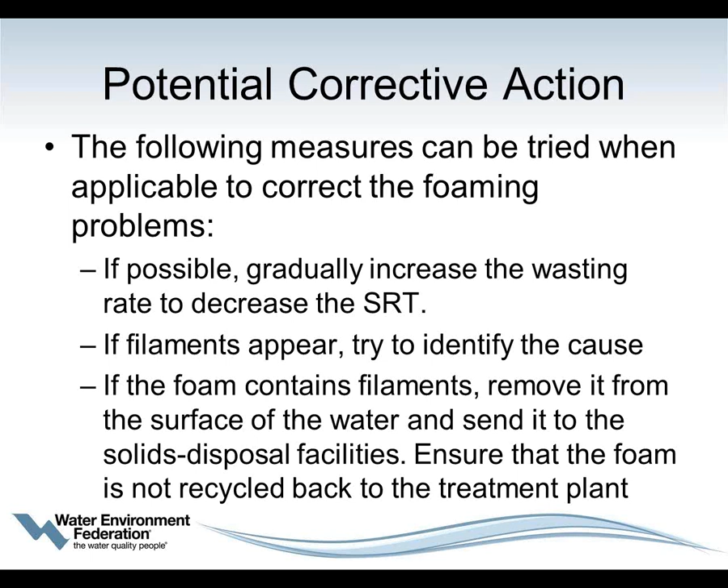Other filaments like Beggiatoa or Thiothrix, for example, really respond very well to chlorinating the return activated sludge, and you can get rid of them fairly quickly by doing that. But you want to try to get rid of the foam. That's probably one of the most important corrective actions you can take.

So what happens if you're getting suspended solids carryover from your clarifiers? You need to analyze it. Is it due to hydraulic overload? Did you exceed your surface overflow rate because of rainfall? In your distribution box, if you have more than one clarifier, are you getting equal flow to all of them, or has something happened so most of the flow is going into one particular clarifier? Visually you can tell that right away just watching the volume of water coming over the weirs. Ensure that the weirs are level, because if they're not level, you're going to get short-circuiting in that clarifier, which allows for density currents and resuspension of the solids that will go into the overflow.

Solids overload will also affect your effluent quality from your clarifier. So again, you need to calculate that solids loading rate, and make sure it's within your design solids loading rate for your clarifiers. If not, it may turn out that you have a problem with your return rate, and you need to look at that—you may need to recalibrate your pumps. Or you might have increased your mixed liquor suspended solids trying to correct one problem without thinking about its impact on the solids loading rate.

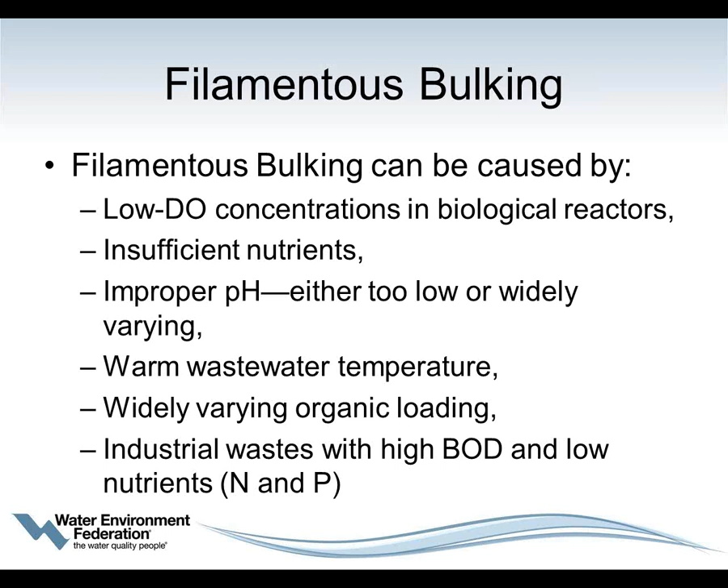If your organic load varies a great deal, either due to the way side streams come into your plant, the way industries come into your plant, or even if you have a lot of septic tanks that discharge to your plant, these varying organic loads can really cause filamentous growth. And if you have industrial waste with really high BODs and low nutrients, that can be another cause of filamentous bulking.

High influent sulfide concentrations give you this organism Thiothrix. Whenever you see 'thio,' it means it has sulfur. So Thiothrix is caused when you've got a lot of sulfide, which could come from too much anaerobic digester supernatant, but can also come from flat sewers in hot climates producing a lot of hydrogen sulfide, which can come in as a slug load into your treatment plant, or even an industrial load. Again, low F-to-M ratios might allow for Nocardia.

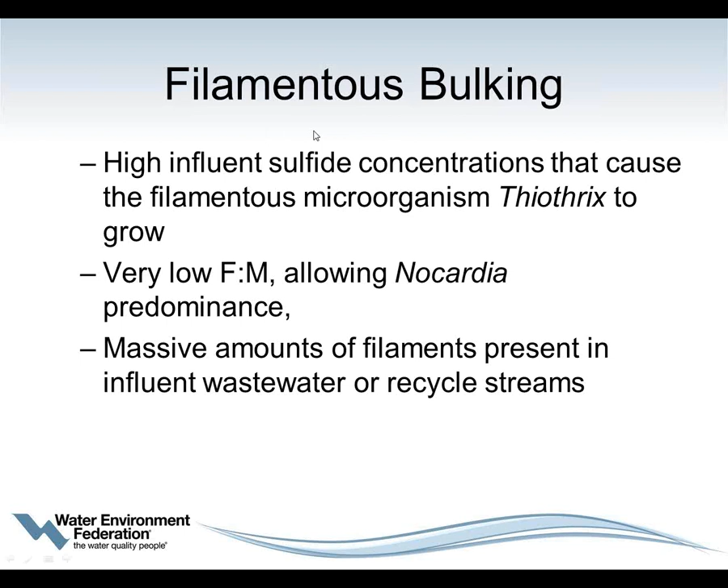If you're recycling a lot of filaments, you really want to try to get rid of them through some control strategy. As I mentioned earlier, Thiothrix, Nocardia, and some other filaments respond well to chlorination of the return activated sludge. You do have to be careful when you chlorinate it, because you don't want to kill the good organisms. So you don't want to use it for long periods of time, and you don't want to use high concentrations of chlorine.

So if you're going to add chlorine, you want to find the good point to add it in. You want to make sure there's good mixing where the sludge is concentrated, like in your return activated sludge, and where wastewater concentration is at a minimum. You really want to attack the organisms in their most concentrated form.

So a lot of treatment plants feed it into the return activated sludge line before it gets to the bioreactors. Typically the return activated sludge line. Sometimes you can put it in the biological reactor, just where the return activated sludge comes in. Sometimes you can put it into an installed side stream that recirculates mixed liquor within the bioreactor.

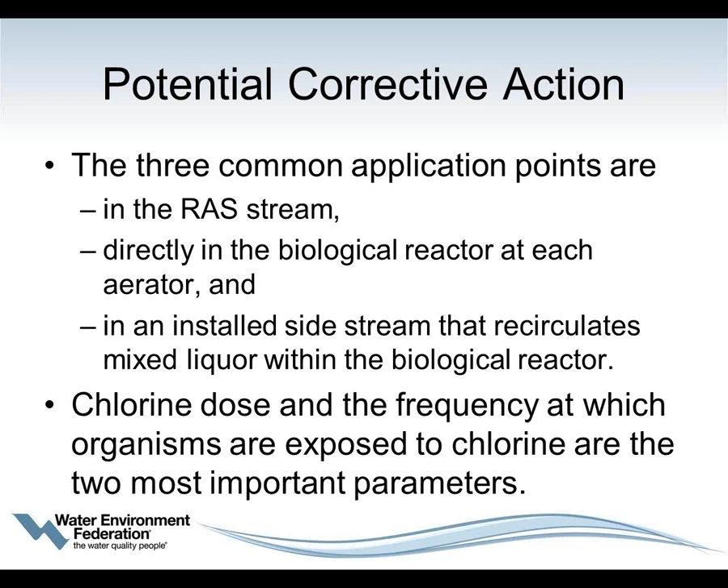You want to look at the dose and the frequency at which the organisms are exposed to the chlorine. Those are the most important parameters. You want to adjust the dose so that concentrations are lethal at the floc surface, but not within the floc. You don't want to kill the good organisms.

So the chlorine dose is based on solids inventory in the process. Typical doses are 1 to 10 grams per kilogram of mixed liquor volatile suspended solids per day, or about 1 to 10 pounds of chlorine per day per 1,000 pounds of mixed liquor volatile suspended solids.

So the other kind of bulking we have is non-filamentous bulking. Sometimes this is caused by polysaccharides, and you can identify those under a microscope by staining your slide with India ink. It's very easy to identify polysaccharides, and that's one cause of non-filamentous bulking.

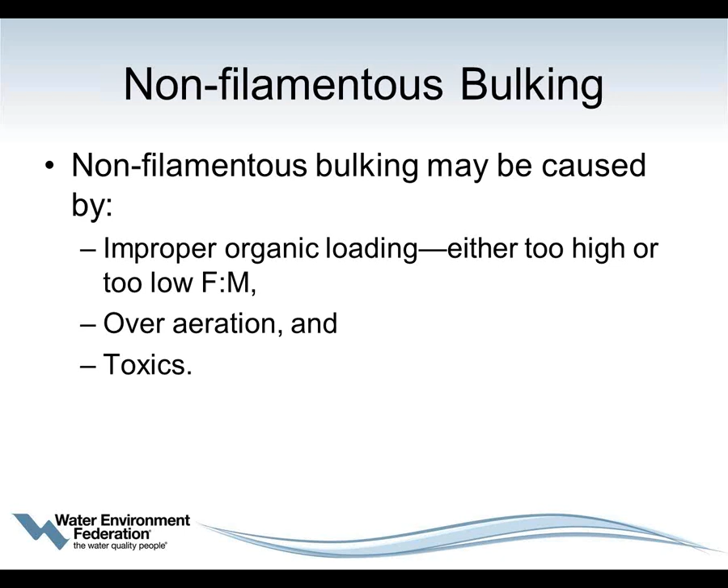Improper organic loading, either too high or too low an F on M, can also cause it. You can see that F on M plays an important role in how well sludge will settle. Over-aeration can be a problem, and also toxics coming into the treatment plant.

So if we look at our potential corrective actions, the first thing you want to do is make sure that it's non-filamentous bulking. Then you want to check your F on M ratio to make sure it's in the target range. You'll see small dispersed floc, which are characteristic of a higher F on M.

If the F on M is higher than normal by 10% or more, then you should decrease the wasting rate, and you want to do it gradually, not all at once. A decrease in the F on M should be reflected by the disappearance of dispersed floc. As the F on M starts to go down and the SRT starts to come up, this dispersed floc should start to go away, and that can take 2 to 3 SRTs.

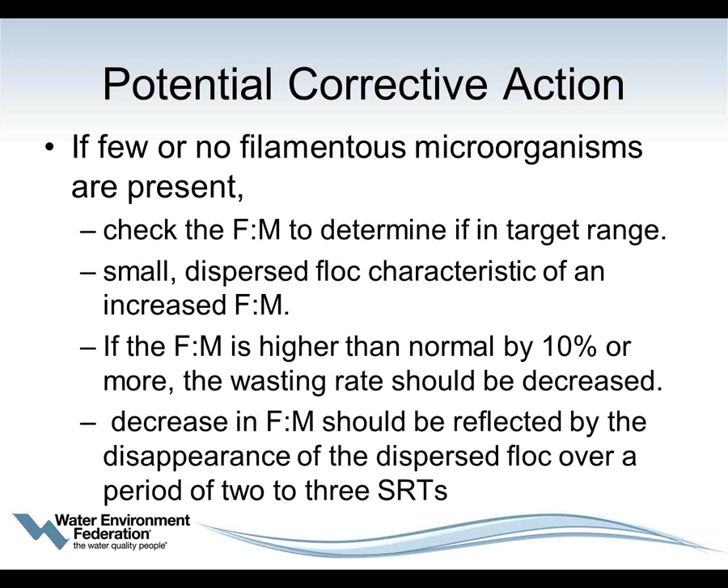And as I mentioned, if you have an SRT of 10 days, that could be 2 to 3 SRTs, or 20 to 30 days.

The other thing is if you have a lot of turbulence in your bioreactors, that can cause shearing of the floc and therefore non-filamentous bulking. Sometimes mechanical aerators can shear the floc because of high turbulence. Sometimes over-aeration is the issue - this would be dissolved oxygen concentrations greater than 4 milligrams per liter.

So what you want to do is get your dissolved oxygen concentration down to 1.5 to 3 milligrams per liter. And toxics - toxics coming into the plant will have effects and will affect the plant in many different ways, and they can affect it through bulking also.

So to summarize today, really when we look at process control and troubleshooting in our treatment plants, you need to understand the process, the activated sludge process in general, and the activated sludge process specific to your plant - how does it work at your plant. You need good process control, so you need good information, good laboratory data, good instrumentation, well-maintained and well-calibrated instruments, and laboratory data with a good QA/QC procedure.

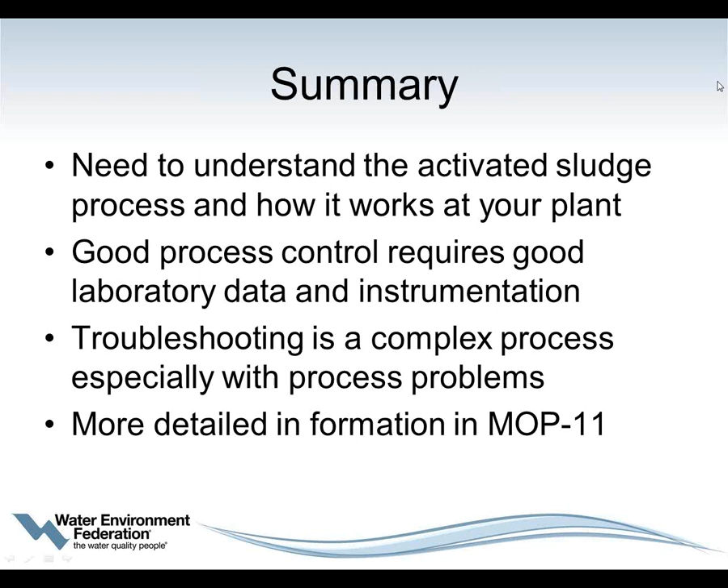Okay, so we will take a few questions. The first question, how to prevent denitrification in the clarifier? Part of it is not maintaining a thick blanket in that clarifier. You really want to work at a very small blanket, as I've mentioned, and if you maintain a smaller blanket, it will help. If you are required to remove nitrogen and do denitrification within your bioreactors, you want to optimize that process. If you don't have to nitrify, then don't nitrify, and then you won't get denitrification. So those are a few things.

Question about the ratio of BOD, nitrogen and phosphorus. It's 100 BOD to 5 nitrogen to 1 part phosphorus.

Can you provide a few examples of new technologies to reduce aeration energy costs? Yeah, there's some new blowers on the market. They're called turbo blowers. They're much more energy efficient, low maintenance. So those are good ones to look at.